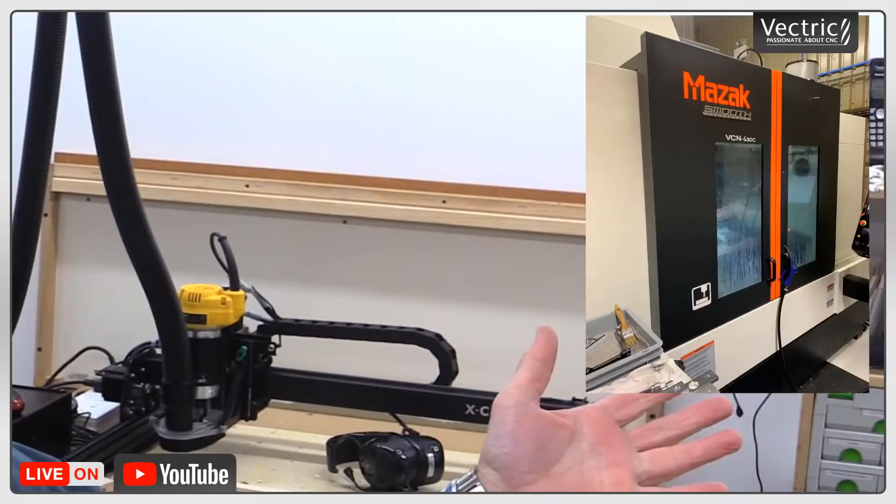I don't intend to talk about doing simple signs or coat racks today, but I hope you'll enjoy what you see. Some of you may know that I design woodworking tools, most of which are manufactured in this country, on very clever CNC machines like these, and they need a lot of very clever people to run them too.

My wasteboard has a number of holes in it, as you can see, and the backing board underneath has a whole bunch of screw inserts. If you've not seen a screw insert before, they look something like that, and you can buy these from all sorts of places - Screwfix in the UK, eBay is probably a good place as well, wherever you are in the world. So those are down under here, and when I want to hold something down, I've got these little screw clamps.

That's what they look like. You can make up your own very easily. Those screw down into those screw inserts, and I can then trap whatever piece I'm working on with some of these homemade clamping pieces. They're very simple, I actually made them on the CNC. They've got a long slot, and a notched area so that they can clamp down onto something and hold it in place. Because they're made of wood, it doesn't matter if you accidentally hit it with a tool either.

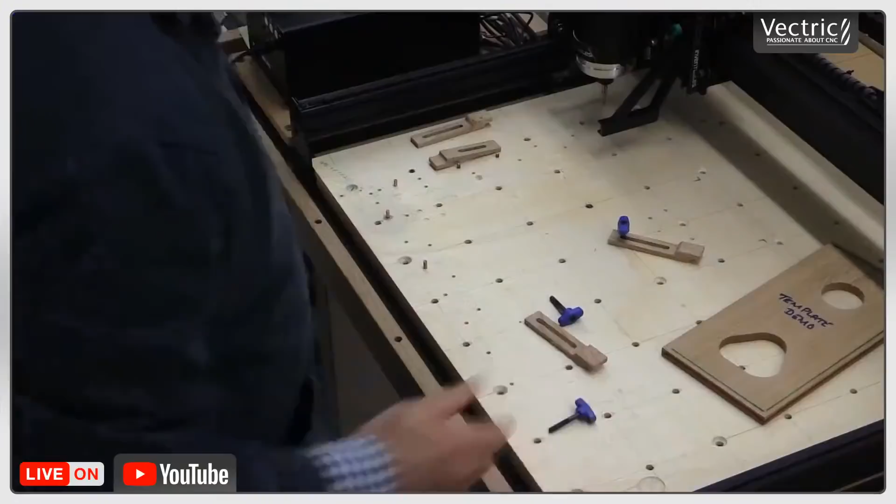Now, when I first started using a CNC, I always found it a bit difficult to work out how I could clamp my piece of wood, my job, down so that it was in the right orientation as far as the X and Y axes went, so I didn't have it skew-whiff. It took me about a year to think of this, but I got hold of some brass dowel, 4mm in diameter.

What I did was put a 4mm cutter in my spindle and drilled some holes, first of all 8mm from the machine's home position in the Y direction, because when you put this into one of those holes, 8mm from machine home, the outside is actually 10mm from machine home. Then in the other direction I drilled holes which were also 8mm from machine home, so the outside of that hole, the side of the peg, is 10mm from machine home. That means when I put something in here, this corner is 10mm in the Y direction, 10mm in the X direction from the machine's home. So that gives me an instant way of setting up the X and Y home positions for a job. I just add 10 to the X and Y hard home positions after they've been set.

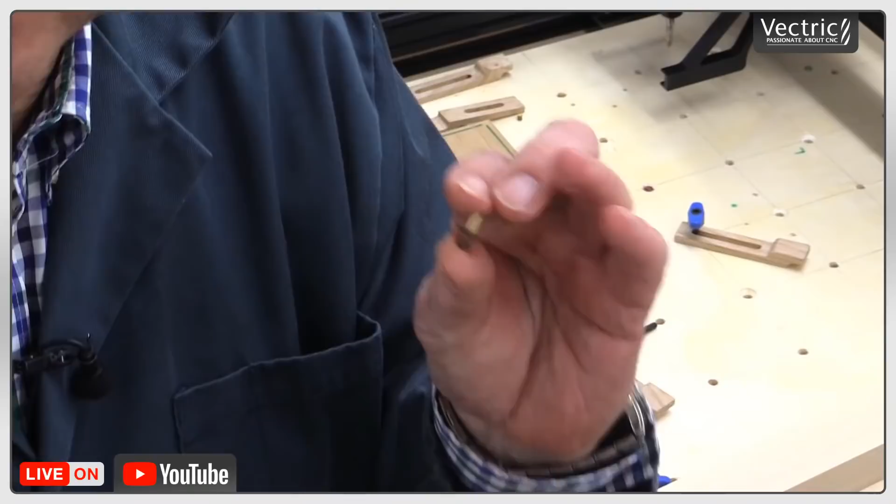Now, I mentioned my 4mm brass dowel. I actually have a lot of metal, and I'd like to show you this little storage box I've made for my various bits of tubing and metal dowel and various other bits and pieces.

There are varying lengths. For example, in this area here they're no more than about 30 centimeters long, whereas in this area they're up to 1 meter long. Inside here I've got some tubing, and if I pull out this one, you'll see what's going on. There's a short piece of tubing that fits down through the top, and since it's short, it fits into a little recess at that level, so when I drop these bits and pieces in, they don't fall through. These are a little bit longer here, and then it gets longer still, and so on. The tubes at the front are ordinary white plastic water waste pipe, and the tubes at the back, three of them, are black rainwater downpipes, guttering downpipes.

Now, in order to get all the holes in the various pieces of wood, which are at different levels, I've used the CNC bridge.

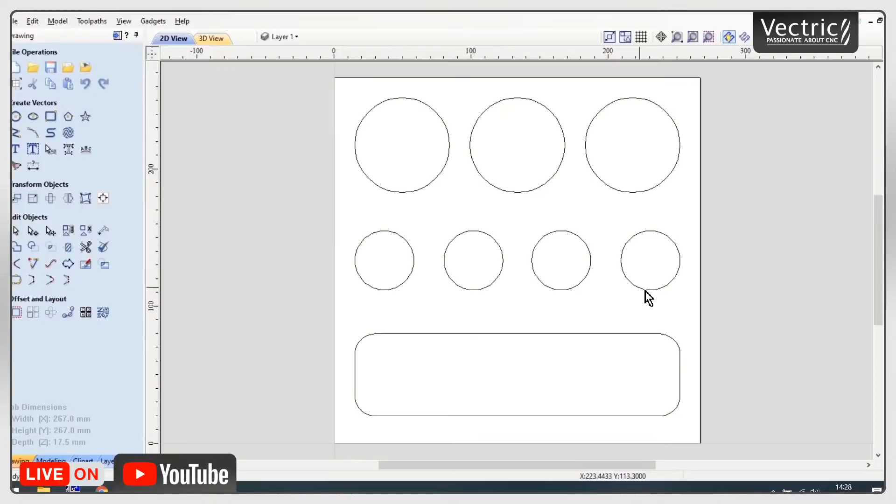So I'm going to deal with the holes first of all. I'm going to highlight them all, like so. I'm now going to go to my toolpath menu, and I'm going to choose the profile toolpath, and I need to be cutting here at a depth of 18mm. That takes me safely through the material.

Now my cutter is already selected, but I want a 1/4 inch or 6.35mm end mill. It's selected there. But if I were to press select, I can choose from any one of the cutters which are already provided with the default program, or you can create cutters of your own. When you do that, you can specify some extra notes.

And I've actually created this one. It says it's a 6.35mm 1/4 inch, and it's set up for wood, because I've now set up my parameters here of the feed rate and the plunge rate that I want this tool to operate at. And that's really important. If you were doing cutting in metal, you might want to have these a lot slower. Anyway, so I'm happy with that cutter.

That's selected. And now you've got to decide how you're going to use the drawings or the vectors you've created here. I want this cutter to go around the inside because we're making holes. So that's as it's selected there. Now there's one thing you really must make sure of: once the cutting comes towards completion, you don't want the piece in the middle, the cutout piece, to start rattling around and get hit by the rotating tool.

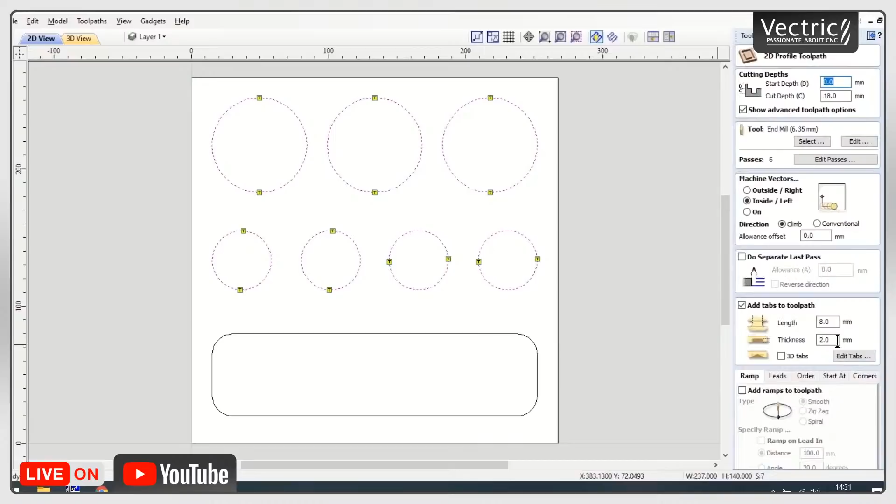And the only other thing I've got to do now is to give this first toolpath a name. So I'm going to call it top tray, or top level. I think when I actually did this the first time, I called it something completely different. Top level. And I then say what cutter: I'm going to say 635 end mill.

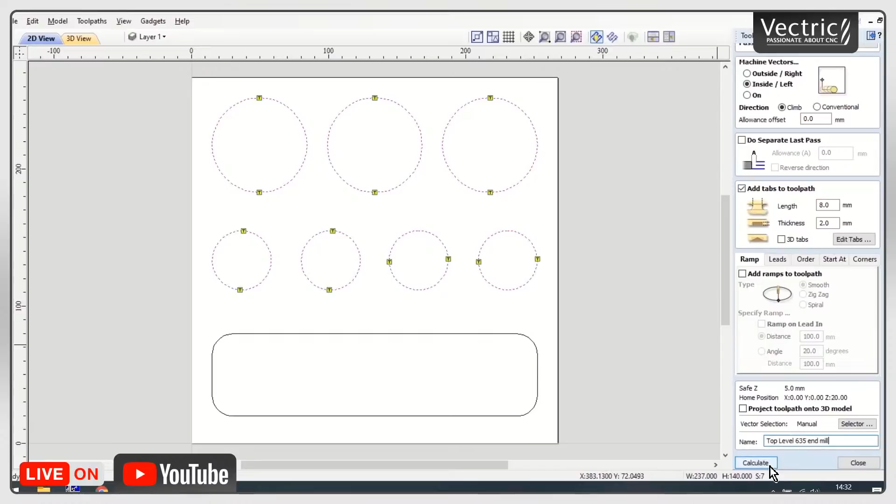So I now will save this toolpath eventually, and it's going to be called something realistic, so I can then remember, yes, it is that particular end mill. So there it is. The software is warning me I'm going to cut through the material. I'm happy with that. And if I preview this toolpath, you can now see those are my holes, and you can see the tabs here.

So that's super. I can close that, but I want to save this as a toolpath. So I go save, and this is where you can now specify how the file is saved to suit your CNC. My CNC uses G-code, and it is the X-carve CNC. Vectric know about the X-carve, and it's one of the options you can take from all of these different CNC machines and so on.

Anyway, so I'm happy, X-carve, G-code. So I'm going to save that, and it comes up with the same name I used before. I'm happy with that. Save. So I've now saved that. I can now close that dialog, and I can go back to my drawing. Deselect those holes that had already been done. I'm now looking at the tool tray.

And for this one, I want a pocket toolpath. It's this one here. And this happens to have the right parameters here. I want the cut depth to be 8mm. My same cutter is selected, so I don't have to change the tool. There are some other parameters here I don't need to change.

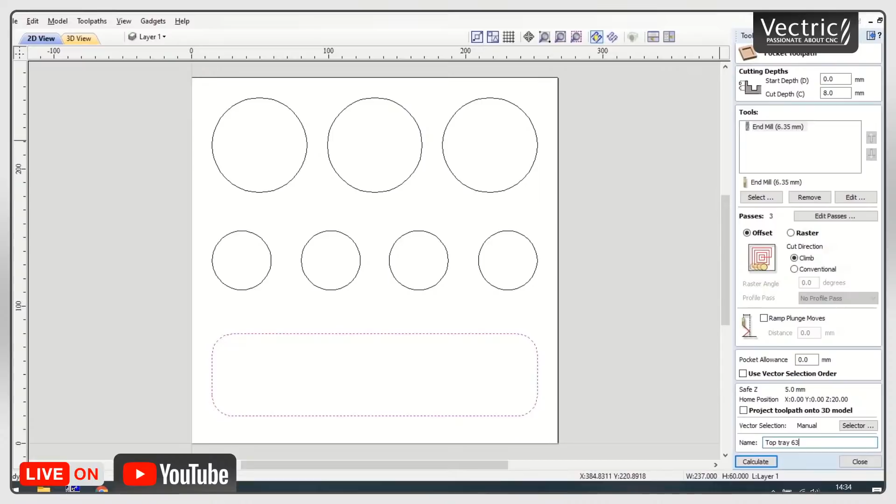I just need to give this an appropriate name, so it's top tray. So I can call it top tray, and my same convention, 635 end mill. So I now know what tool it is I set this up for. And there is my little tool tray area. So that's done. I can close that, and I must now save this toolpath again in G-code, save toolpath.

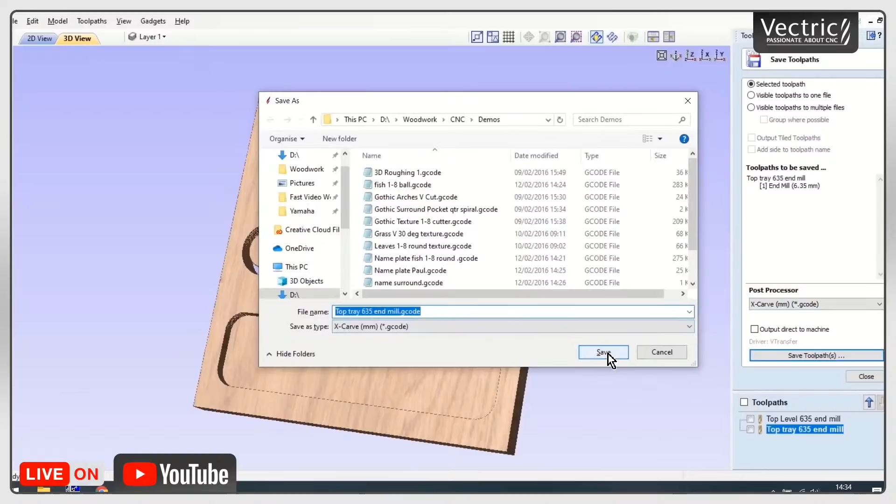There it is, save. Now we're at the next level down, and that means that 2 of my circles, these 2, are going to be stop ends. But these 5 here will be holes again. So I've now got those 5 holes. That's fine. Unselect those. I'll select these 2 now.

Now these are going to be slightly different. These are going to be the same profile toolpath selection, and this time, to guarantee the pipe can go into this hole, I'm going to actually have my profile on the line. It means the pipe can go down to the stop end and fit in it with no problem at all. No need for any tabs or anything like that, of course.

And so I'm going to call this level 2 stop ends, and it's 635 end mill. So there we go. Calculate. And if I do preview, you can see now how that's going to work.

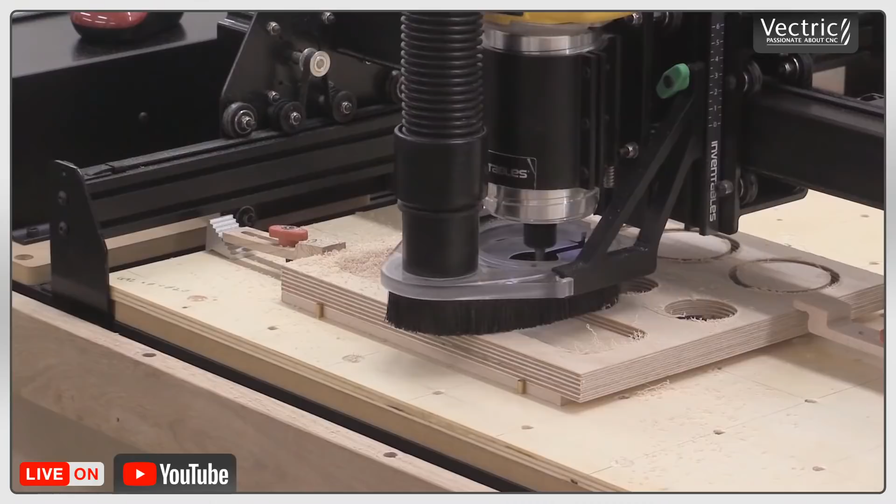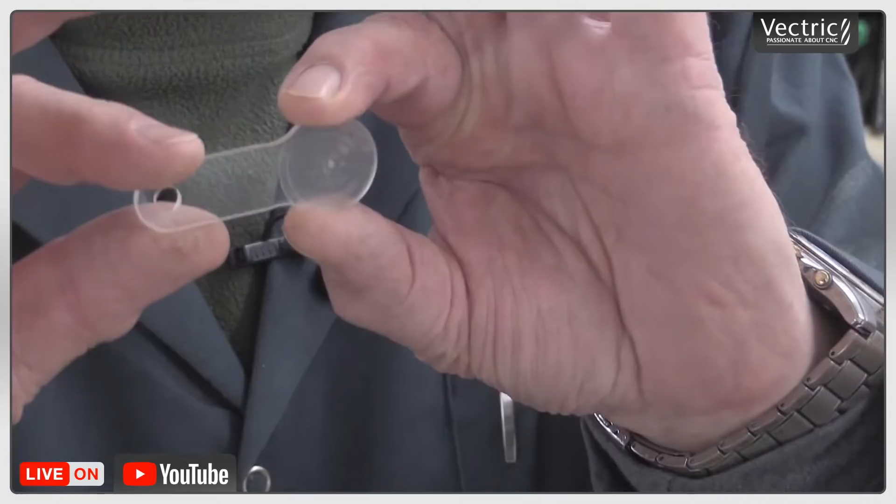And with it up this way, I think you can see just how it's working. Now, before Todd disconnects me from the conversation, I want you to look at this and have a guess at what you think it might be. Diameter is a particular diameter, thickness is a particular thickness. There it is. Wow, that's a great first section.

Lots of good stuff in there. So I'm going to pick out some of the things that I think are interesting, and then we'll go on to talk about what Peter has given us, a lot of stuff to give away to you guys. So I'll talk a little bit about some of the files he's given away for us to include in the package of stuff you can download at the end of all this.

So first of all, the threaded insert thing into your wasteboard. Great idea. We have a couple small format CNC machines in the labs, in the office, and that's what they use, and those are brilliant for screwing down stuff, and using that with the wooden clamps and so on. That's perfect. The wooden clamps, those are great, and as you pointed out, if you hit a wooden clamp, it's way better than hitting something that's metal. So what he's done is given you the file he used to cut his wooden clamps with.

Now what's great about this is Peter tends to use his machine as just a tool in his shop. Just like any other tool he has, he uses it when he needs it, and then maybe the piece becomes part of a bigger project, or maybe there's some work to be done with a traditional woodworking technique. That's the same as with this.

If you cut these from their side like they are there, you're still going to need to figure out a way to put the channel in the top of them so you can screw in the holder. I would love it if somebody could come up with a neat way to index these, and then you could actually put that little channel in with your CNC machine as well. That would be really kind of cool. Anyway, so that file is yours for free as well.

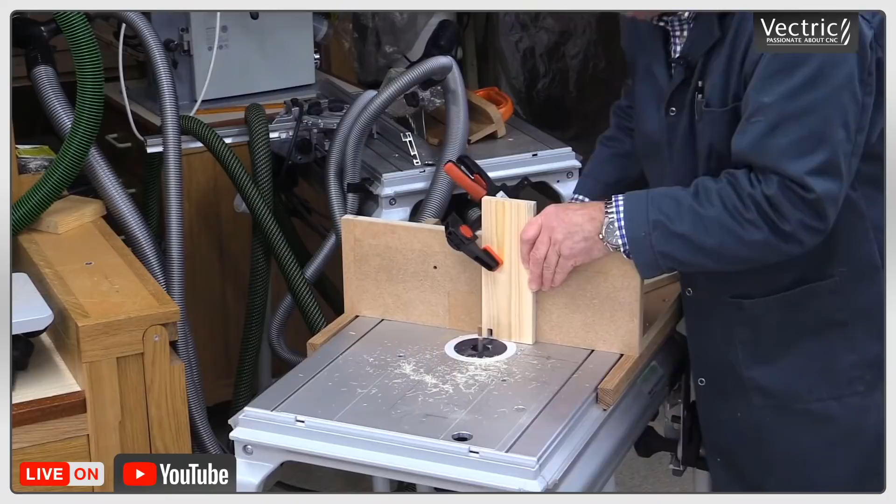All of these parts are terribly easy to make, and the way this works is quite simple. With the first piece, we're going to hold it up against the stop there, move that over like so, and we keep moving it over. Turn it around, put it on there, and then for this next piece, carry on as before with this one.

There are two pieces which go together like so, and you would glue this up and then plane it off or sand it off. And if you do that on all four sides, put a channel in for the base, you then have quite a useful tray or whatever else it might become, a box and so on.

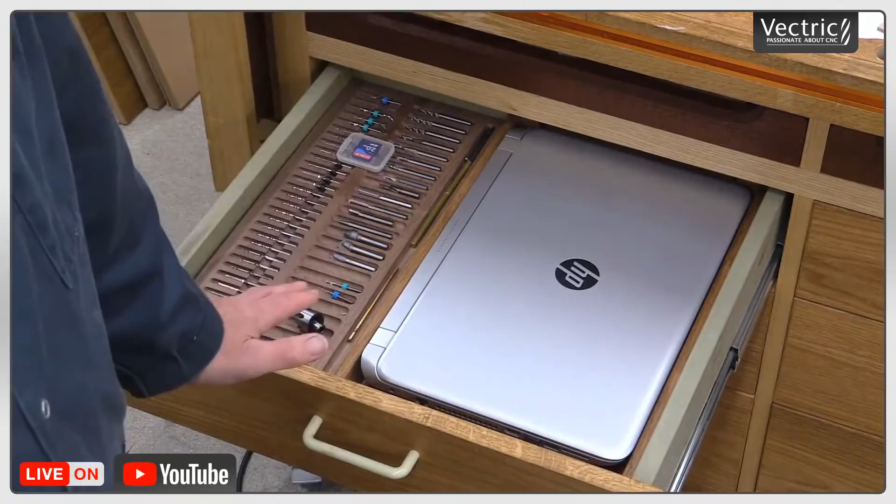Right, I'm now letting you into the secret world of my workshop drawers, well, of this drawer in particular. This drawer is my sort of CNC drawer. In there I've got an old notebook computer which just about does the job in the workshop, and that's on a little tray like this.

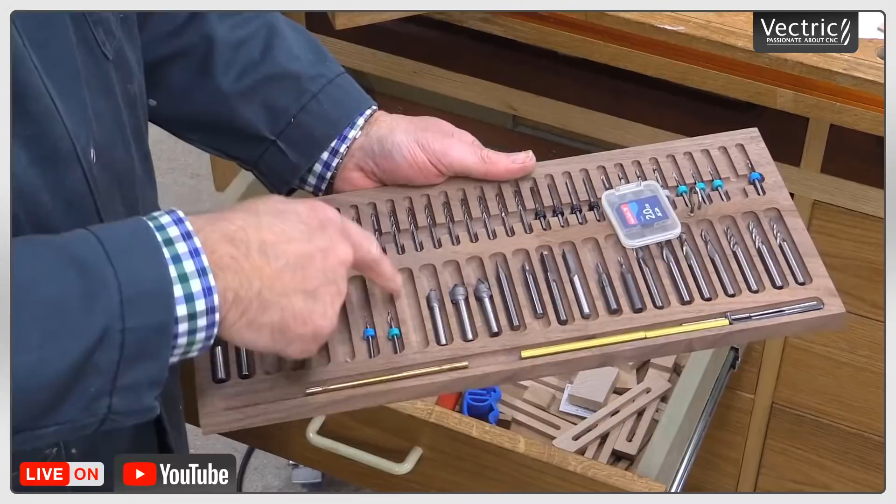And here I have all my various cutters. Now I made this with the CNC, and I'll make sure that the file for this is available to you. And underneath here I've got my sort of little hidey hole place where everything gets put to one side. A couple of things I want to show you here.

I've mentioned these before. I've made all these little hold down things. Some have got this notch in them, some are just straight, and I keep a whole bunch of those in there. Now this little brush is really important. When you've done a bit of sign writing or whatever it might be, using a V cutter, sometimes you get tiny little hairs of wood left in there. Well, this brush has plastic hairs, and you just rub it quite vigorously across there. It doesn't do any harm to your actual carving, but what it does do, it removes the majority of those little hairy bits. And this is a cheap and cheerful brush, which I bought from Axminster many years ago.

Now there's my computer on its tray. On the underside here, using the CNC, I've made a recess to take a large metal washer, and this metal washer is magnetic. In the centre there is a little 6mm hole. Now here, in the top of this little box, I've got 4 magnets which are flush with the surface, and I've got a 6mm brass dowel peg.

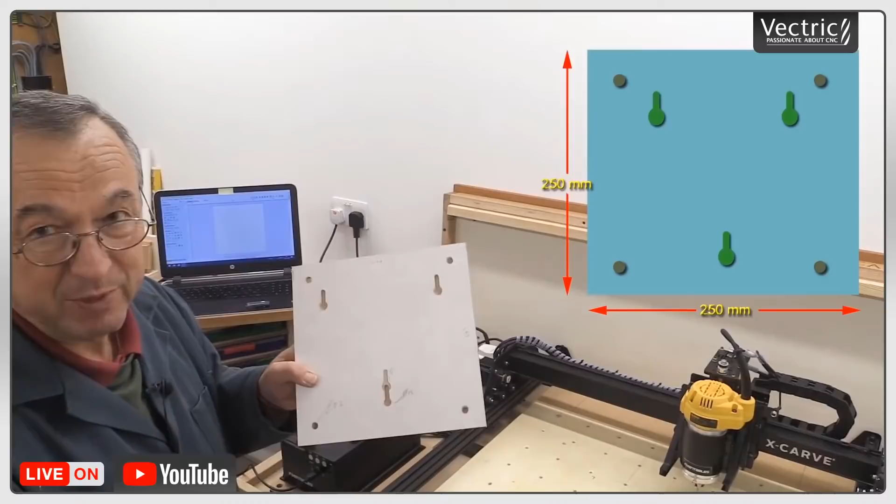So this is what I've done. It's going to be about 250 millimeters square, with 4 holes, one at each corner, 200 millimeters apart, for the 8mm bolts that will be fixed to the TV. There'll also be 3 little slotted holes in a triangular pattern for screws into the wall, so the plate attached to the TV can be lifted on and dropped down onto those screws, and it won't fall away because the screws sit in the slots.

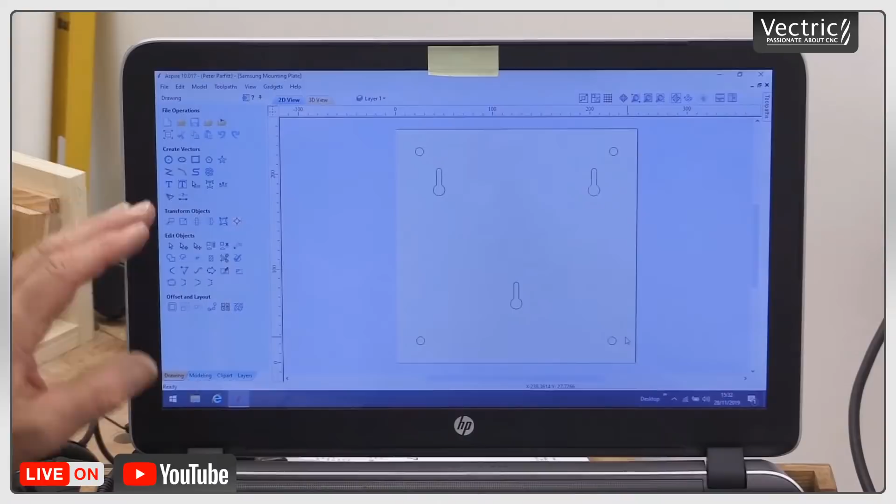In the Aspire program, I started by saying my piece of material is 250 millimeters square. My material is a piece of aluminium plate, 3 millimeters thick, bought via Amazon for just over £5. I've then positioned 4 holes, one at each corner, 8.2 millimeters in diameter, which allows the 8mm threaded bolts to go through into the back of the TV.

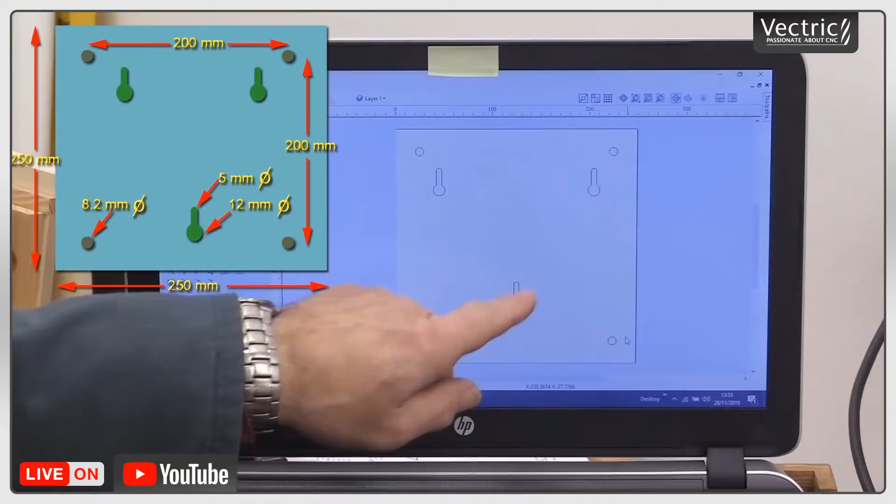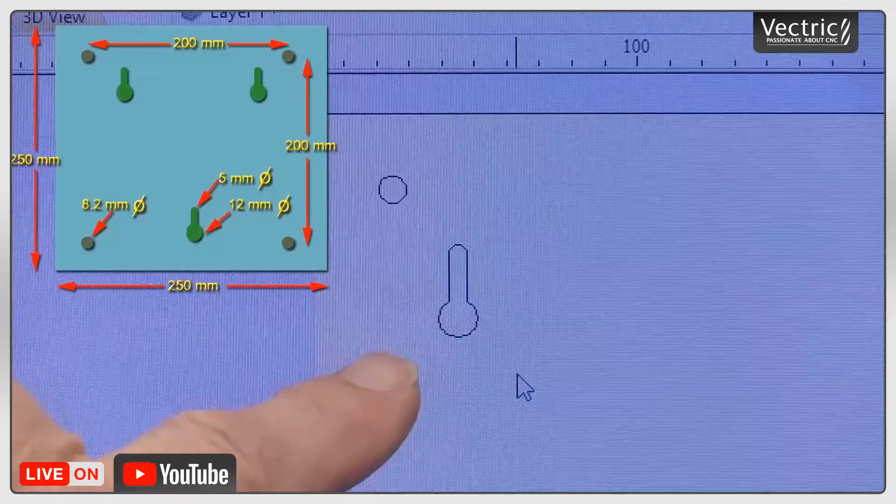I've created 3 identical slotted holes, starting with a 12mm diameter circle, then a 5mm diameter circle, linking the two with a straight line and getting rid of the redundant parts of the two curves to make one entity - that shape. I've then copied that to the other positions.

I've then created tool paths - I know it's not terribly clear from where you're looking, but the 4 holes are here, and the 3 elongated slotted holes are there.

The particular tool I'm using is a 3mm end mill. I've set my cutting depth to 3.5 millimeters because I want to go all the way through the aluminium. I'm using a profile tool path, and I've set the tool parameters really modest. The reason is I've never cut aluminium before, so for example my pass depth is 0.1 millimeter - every time it starts a cut, it only goes down 0.1 of a millimeter. I've also set the feed rate to 0.5 millimeter a second, so it's not going too fast.

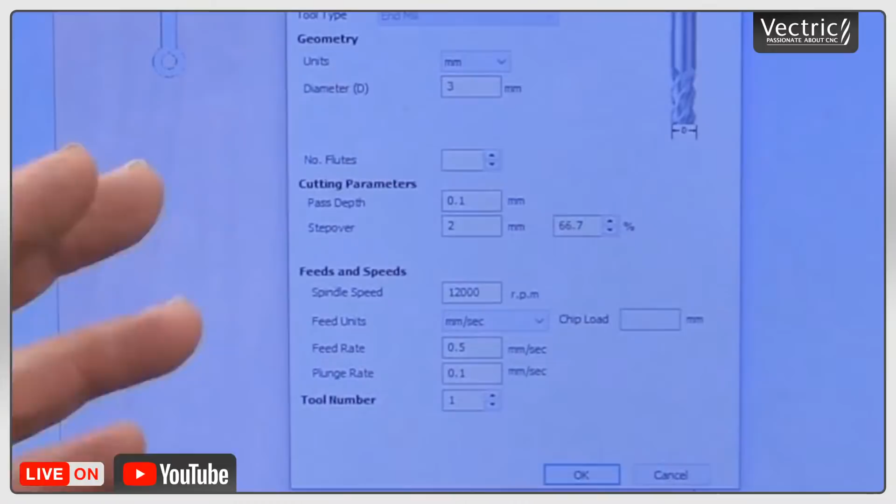My plunge rate, as it goes downwards to start the new part of the hole, is 0.1 millimeters a second, so it's plunging down very slowly. I've set this up this way because, as I said, I've never done aluminium cutting before, and I really do want this to work well. I don't want it to struggle and make a bad job.

I've just done the trial fitting of the plate, and the 4 screws - 1, 2, 3, 4 - at the back fix it onto the TV. In my case these are at 200 millimeter centers. And you can see the slotted holes here, which will correspond with some screws I'll fit on the wall behind me, where the TV's going to go.

Now, with the screws and washers sitting in the back of the plate, I've tightened these screws up fully so it doesn't move, but that's not how we want it because it would be very difficult to get this on and off. So I'm going to back these off now by about 3/4 of a turn.

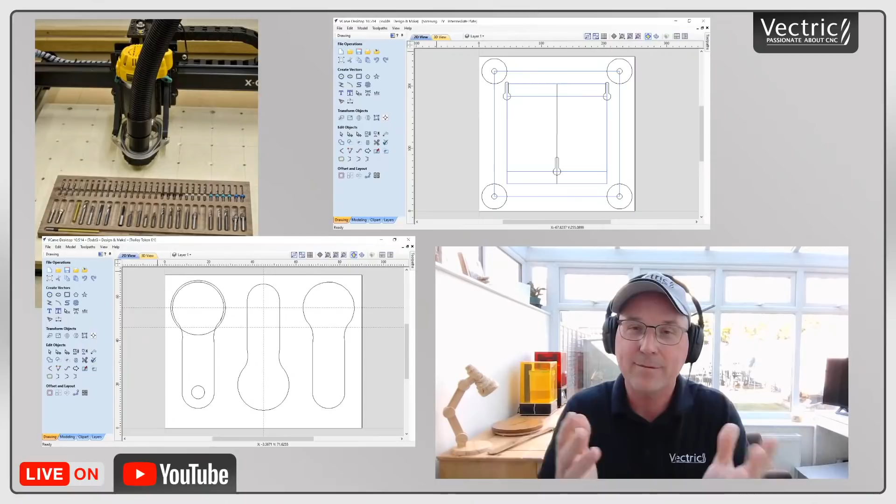And then also the TV mount. Now, this is one of those things—I was just in Costco yesterday looking at the mounts because, of course, I love looking at the TVs there. And just for a static one like this, it was like 24 pounds, so that's almost $30 American for just this static mount. And Peter just made one for under a tenner, as they'd say over here—sounds funny saying that—but anyway, that's amazing. So if you have a piece of aluminum and a bit of time on your hands, you can make this right in your own shop, and that's pretty neat. Thank you for sharing that with us, Peter.

Well, some of you may have noticed when installing our software that you have the option to install a piece of software called VTransfer. VTransfer is kind of the same sort of thing as Universal G-Code Sender, but it opens up some of the options in our software that you may have seen but just didn't quite understand why they were there.

So if you choose to install this when installing your software, when you open up your Save Toolpaths dialog, you'll see at the bottom there's a little checkbox that says output direct to your machine. Now sometimes that'll be grayed out because your post processor won't allow you to use that, but if it is there and usable, and your CNC has the capability to hook up directly to your laptop, you can go right from our software right to VTransfer, right to your machine. It's just a seamless flow of stuff, and it works really, really well.

Now, if you want to give it a shot and you haven't installed it, that's not a big deal. You can just reinstall your software and choose that option, or even better, bring up your Windows File Navigator or File Explorer and navigate over to your program files and into your software's file folder. There you'll see a VTransfer setup file.exe. Just double click on that and it will install for you, and you can give it a shot and see what you think.

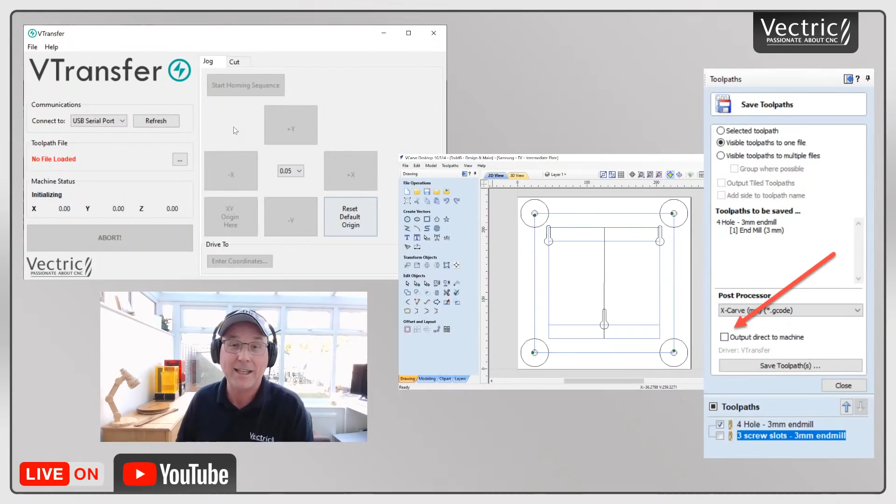It's all very well being absolutely brilliant at making signs that say Fred Bloggs' house or Charlie's coat rack or Fred's bedroom, whatever it might be. But how about making something as complicated as this? So today I've challenged all the clever people at Vectric to try and make one of these. It's a shoehorn, and it's out of a solid piece of wood.

I've been making these for a while. I go about it the old-fashioned way. I rough it out on the CNC, but then do the real work by hand.

Now, this is my shoehorn 3 file. It's my third attempt, in other words. And this time I've produced all of the profiles in one file, and they're in layers.

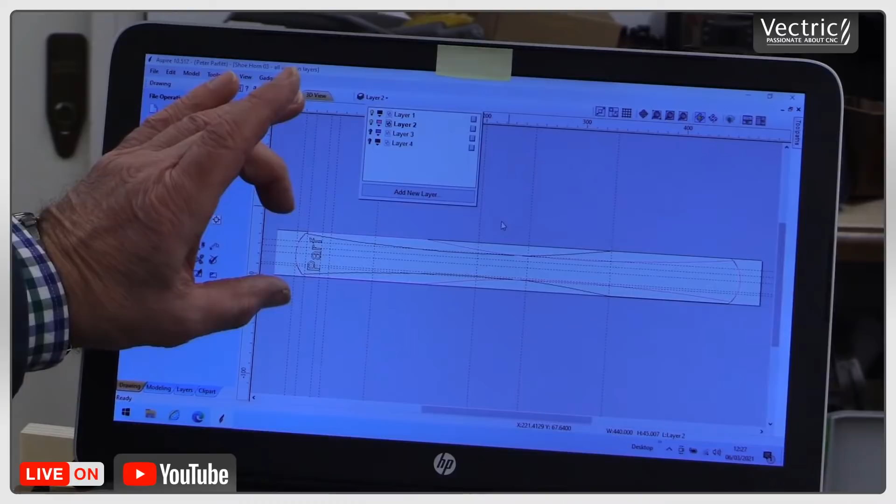Bearing in mind that my stock is not square, it's 35mm by 45, and as you look at it now, that's the 45, and the 35 goes into the Z direction, effectively, that way. And the top 2 layers are the top view, which would have that 45 width, and it's got the Parf sign there.

And these are the other 2 profiles, and these are the side view. Now, I know that I haven't changed the dimensions of my job as far as this goes, but I have taken into account that line there is at the 35 point, so nothing's going to happen beyond there.

So there are the 2 profiles, one with the Parf on the left and the other with the Parf on the right, which allows me to cut both sides of the stock symmetrically.

So I'm now just setting up the tool paths for each of those very simply, and then I'm going to run it. This basic file I'll make available to everyone. There won't be any tool paths because, of course, that is dependent on your particular CNC.

But Aspire or VCarve Pro can give you the whole list of possible machines, and you'll be able to generate your tool paths based on that. And I'm just saving this tool path profile cut now.

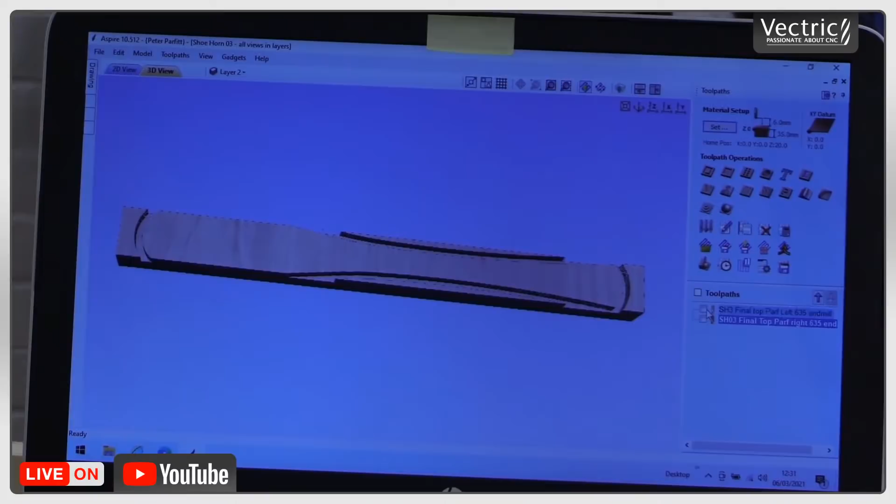And this is the second one, this is with the Parf on the right. If I select the other one, let me just close that, and I'm going to do a preview. And that's the one with Parf on the left, and this one has Parf on the right.

So for that top 2, this last one, Parf is on the right and it does the profile. The one before that, Parf was on the left, it did the profile. And the next 2 I'm going to do are with Parf facing away from me, and it's going to do that profile. And then this is going to be rotated like so, and it's going to do this other profile. So that means we've got profile cuts on all 4 faces.

And there you can see the preview of the side view with Parf on the left. Now remember, we have made a little fib, and we haven't told Aspire that the piece of wood is actually only 35 wide rather than the 45 it thinks it is. So it looks as though there's more material above than there really will be.

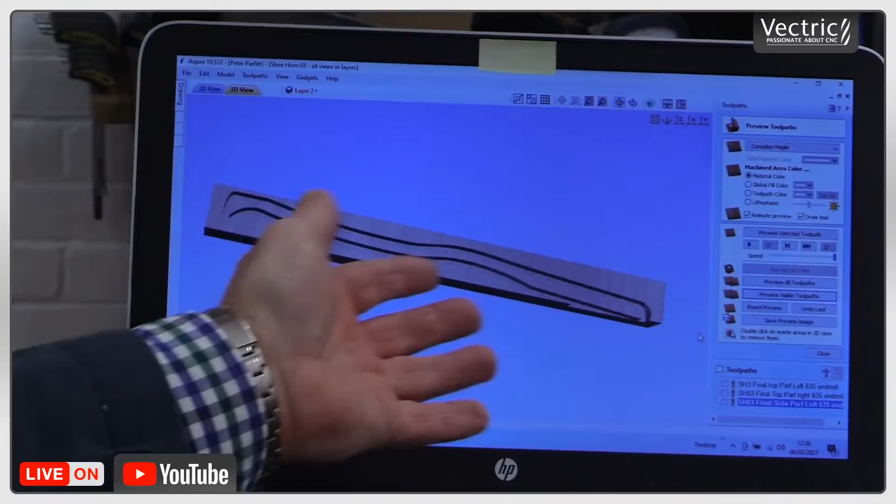And I'll do the same profile with that flipped. So I've called this one Shoehorn 3 Final Side Parf Left. Parf is here, and the other one will be Parf Right. And there's the final preview, side view with Parf on the right.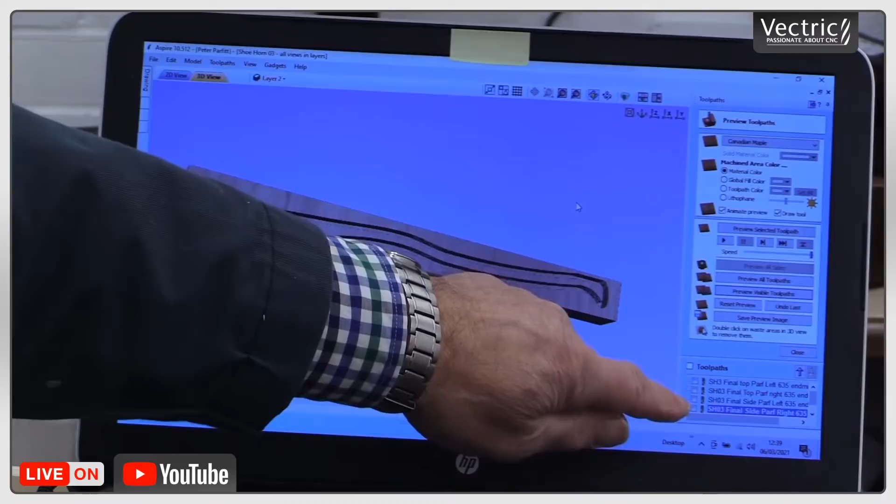Now you can see I've got my list of tool paths here. There are 4 of them, so it's 1 for each face, and each of these tool paths is descriptive. Shoehorn 3, final top, final side, whatever it might be, Parf on the left or Parf on the right. So I know exactly where my piece of stock should be for each of those tool paths.

I can now flip this, and we're going to do the mirror image of this but on the other side. So there's Parf there. We're now putting Parf on the right, we're doing the other side. And note I have enough of these places so that I can locate this properly. So that's secure. I can now run the other profile, which is the top with Parf on the right, because that's where Parf is, just there underneath there.

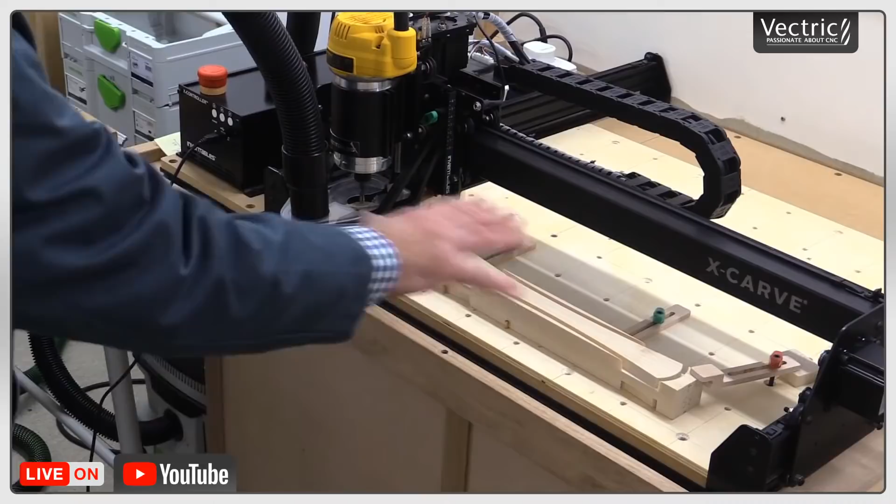And that's the second one done, and you can probably see the shape of both the top and bottom view. Parf's up there. Now all I've got to do is flip this onto a side, and do those 2 side cuts.

Now both the side cuts will be done with Parf facing up the CNC, so it'll be on its side with Parf that way or Parf that way. I'm going to do Parf on the left first, and now I'm going to choose the side profile that says side Parf left.

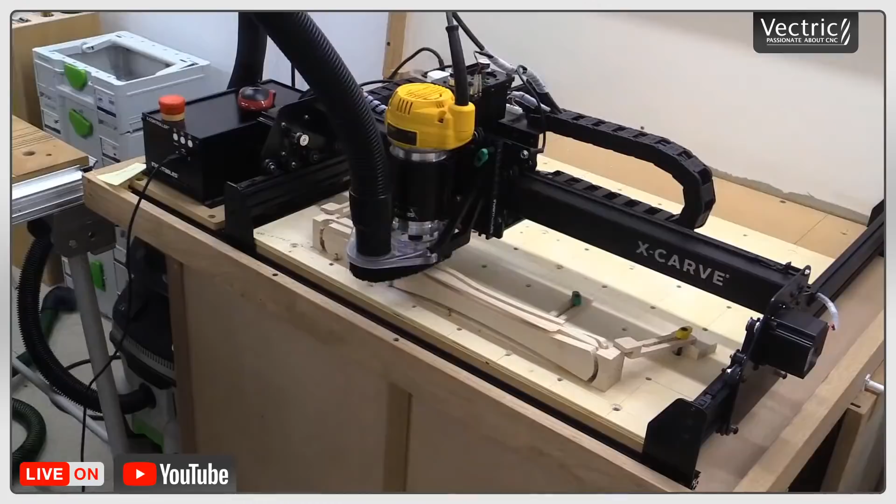And there we have that finished bit of work, and this is where the handwork starts. Well, I suppose handwork starts by taking it to the bandsaw. Right, there's our Parf here, and you can see where we've gone with these profiles, and it's just now a question of cutting through, following the profiles, and then sanding it off.

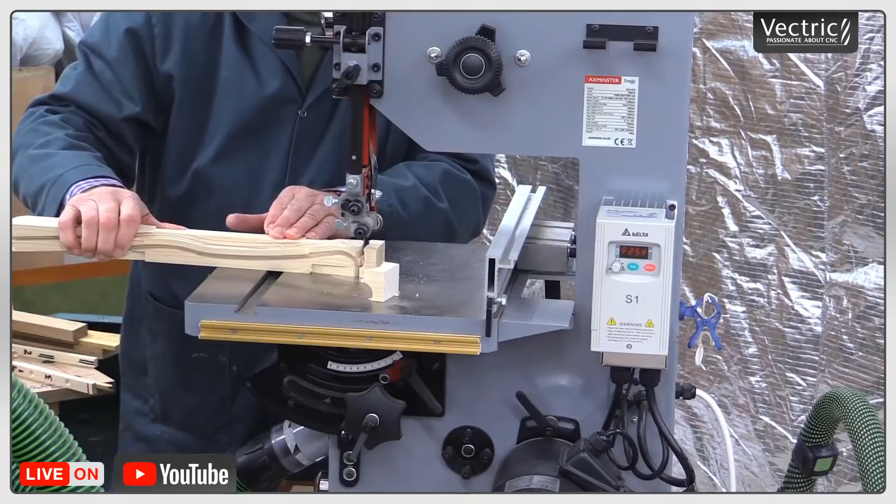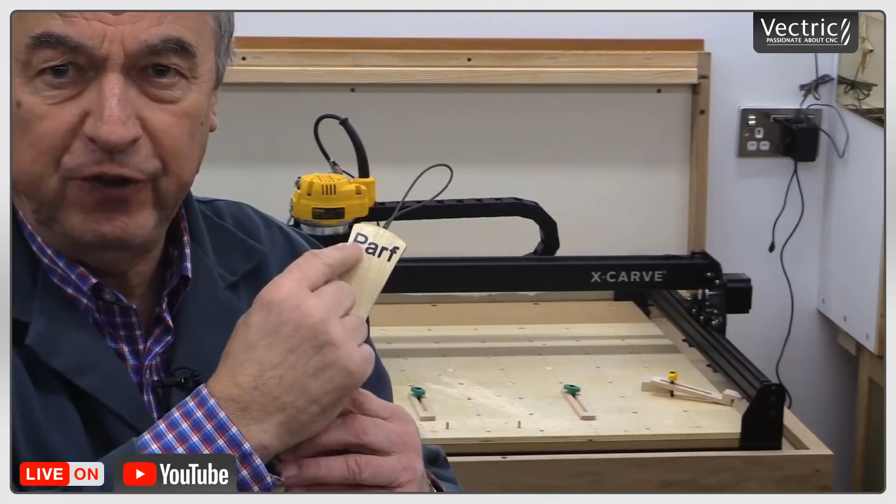And having trimmed off the other 2 sides, I can then start shaping. Once I've finished doing the sanding, I've done the filler here, let it go off, then sanded that clear, and give it a little bit of Osmo oil. And there's the finished piece.

Now, how did those clever people at Vectric get on? I'm sure they've done a better job than me. I don't know about better, but anyway.

When Peter first mentioned this to me, I was really excited about this whole challenge. I love doing stuff like this, not to prove a point, just because it's fun to try and flex your modeling muscle and see if you can make software do things that might be difficult for some people. But anyway, thanks to Peter, he has given me some pictures to go with.

Now, a shoehorn, I don't remember ever seeing one. Maybe when I was a kid, little plastic ones you might get at a shoe store maybe. Even longer ones I may have seen, maybe my grandparents had one, but I've never had a need for one. Not yet anyway, maybe I will. So I really didn't know what to do.

So Peter's pictures were a super help. And then also he sent along the file, like he had said in his video, with all of the different layers in there, so I could go ahead and get an idea of what he was doing and the general shape of things overall. So I did come up with a shoehorn in the end.

Now I pulled a lot of tricks, a lot of modeling techniques, a lot of ideas that we've used for other projects and so on. But there's no way that I can go in depth into all that stuff during this video, so I'm going to touch on a few things.

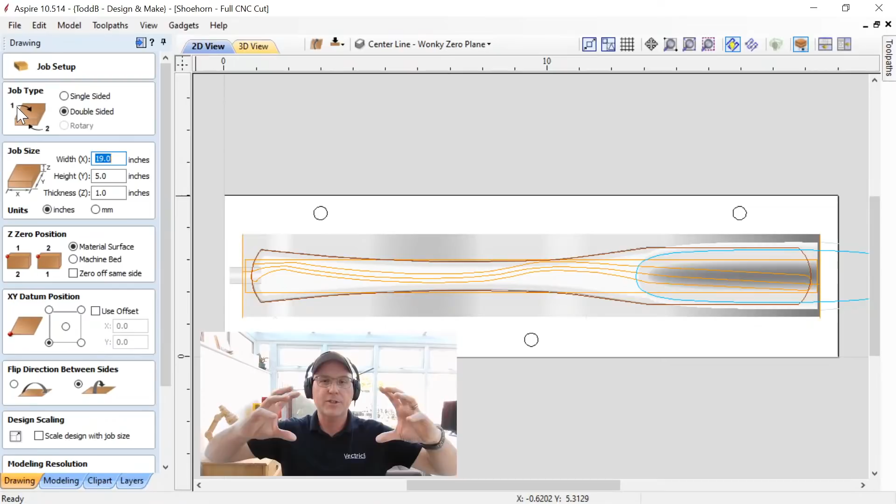So let's have a look at my job setup for this. Now, there's some important things I want to point out here for you. Peter had used a squarish block of material, and I didn't want to do that. I'm cutting on a 3-axis CNC, only wanted to do a double-sided flip. I didn't want to index it four sides. I didn't think that was necessary for what I was doing.

So what I did was I took his shape and I angled it so that it fit inside of a piece of stock that I had in the labs, and that happened to be a piece that was about 1 inch thick.

So this is going to be a double-sided job. I kind of gave that away a second ago. The width of the job is going to be 19, the height is 5, the thickness of the material is going to be 1 inch thick.

We're going to zero off our material surface. Bottom left-hand corner is going to be our datum. We're going to flip bottom to top.

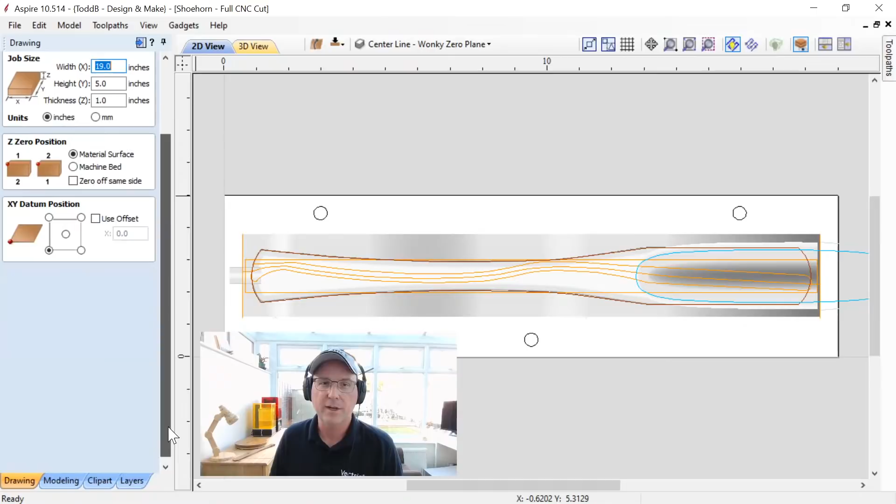And the biggie down here at the bottom is that we want to make sure we have this set to a very high resolution. Because we'll be creating some 3D content, we need to have that turned up as high as we can so we get nice smooth shapes. And we'll just click OK.

So the next thing we'll look at is our layers. Now, like I mentioned, I started this off with Peter's file, so there are all of his layers up top, and then I have my layers at the bottom, and I tried to color them the best I could after the fact. By the way, Peter told you it was his third file, his third version - oh, this was actually my fourth. It took me a few kicks, different ideas, different thoughts on how I could create this thing, and then finally came up with this, which I think worked out okay in the end.

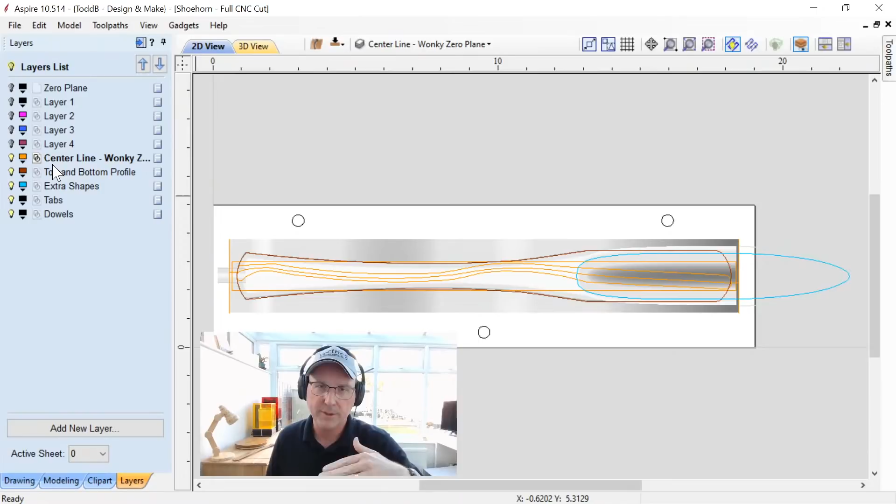And then I have all of my different layers set up with my different bits on all my different parts. Okay, let's have a look at the modeling tab. Now this is surprisingly an uncomplicated part when it comes to the amount of components we need to make this. There are really only 3 on the top, and then equally if we look at the bottom side, we have 5 on the other side, and then the rest of them are made up of the actual tabs to hold it into our material.

Now I haven't showed you the 3D view yet, so let's do that - actually what I'm going to do is hide myself, you don't need to see me anymore. And let's go ahead now and take a look at our 3D view of this thing, and you'll see what I came up with. So there's the shoehorn right there, from the side, from the top, and then from the bottom.

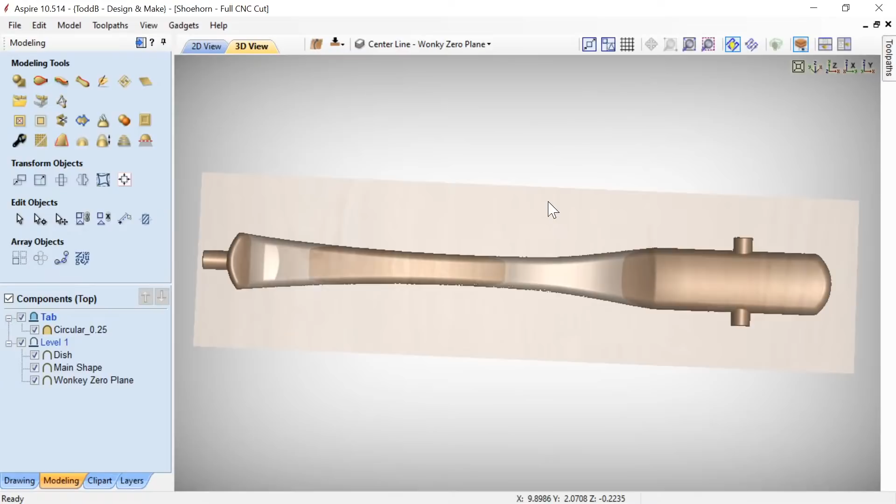Okay, you'll notice that I only have 1 tab on the top, and I have 3 on the bottom. So these only needed to be half tabs at this end, and the other one I wanted to be a full tab-ish with a squish tab. Okay, so that's why that.

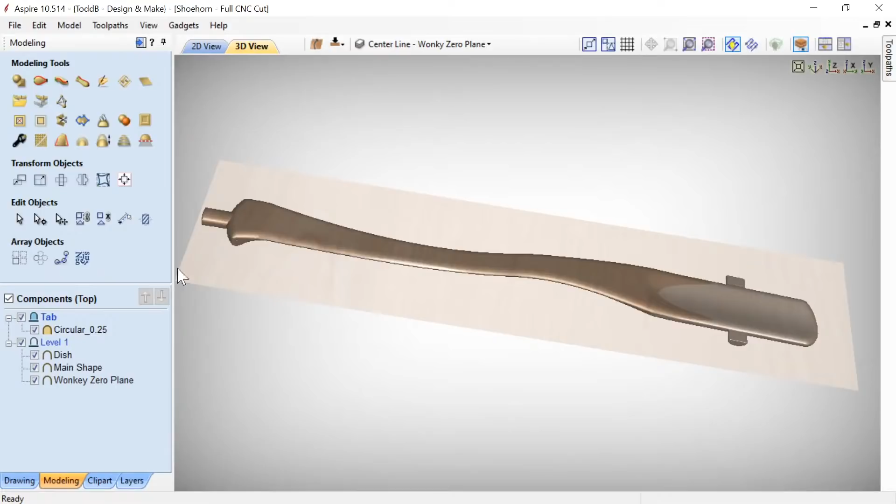So, like I said a second ago, I'm going to point out the high points of this. First of all, I'm going to turn off my 2-sided view - I don't want to see both sides at the same time, I only want to see one side. So you'll see that I have just the components that make up the top of my shoehorn. And then I have this thing underneath here.

And this is what I call my Wonky zero plane. So if I right click on this and say show only this, you'll see that I have this zero plane that I built. Now, this zero plane was derived from a line that I created through the center of the profile that Peter made his shoehorn from. You'll see it right here going along.

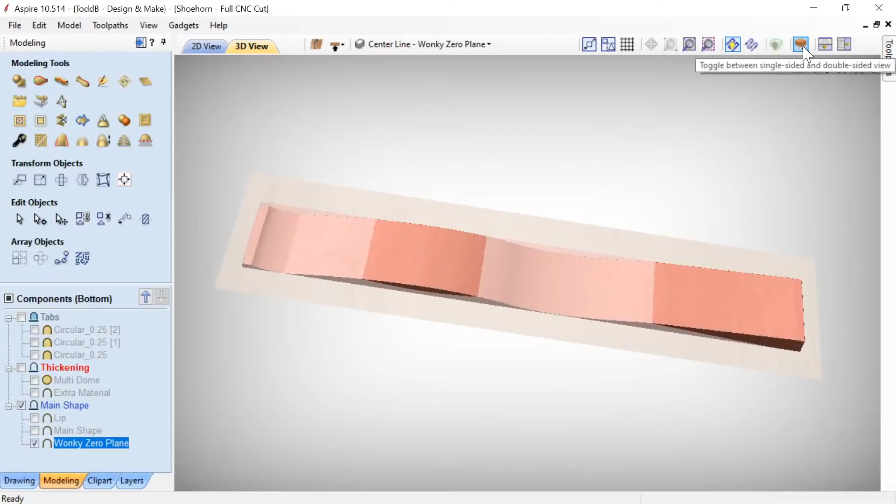Now, I have that same profile on the top side and on the bottom side, and that's there for a reason. So if I go to my other side for a second and show only my Wonky zero plane, and then preview both sides, and go to our 3D view, you'll see nothing shows up. If I unhide this, you'll see just the back and so on. So really what I'm doing is creating this plane that I can start to add components to.

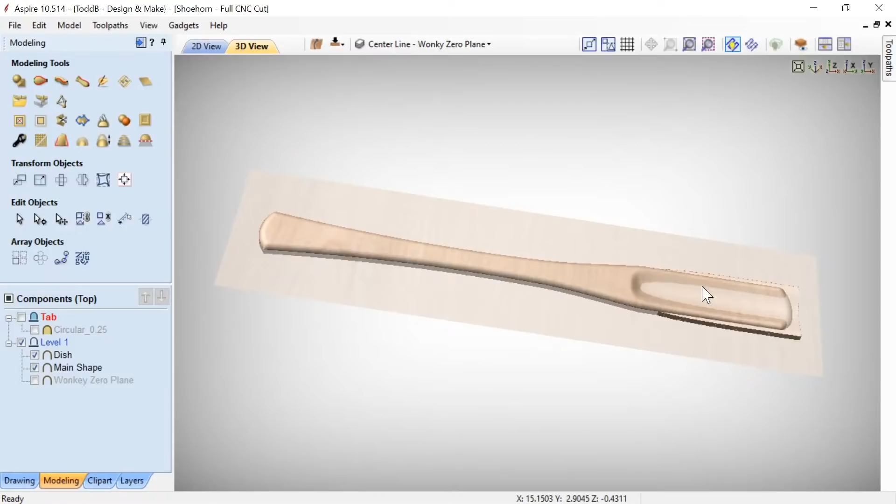So if I go to my front for a second, and we start adding on my components, let's go ahead and turn this to a single-sided view. Let's hide my Wonky zero plane - I'm going to show you my main shape. So this is the main top shape of my shoehorn. Then we're going to add the dish to the bottom for your heel. And then if I add my Wonky zero plane back in there again, you see now it follows the shape of that shoehorn.

So there you go, that's that. And then I add in the tab at the end. Let's go to the other side for a second and take a look. Same thing - there's my Wonky Zero plane, there's my main shape, and there's my lip on the end that I'm adding, a little tail lip there. And then I'm adding this component, or this level, right here. I'm going to just briefly go over this.

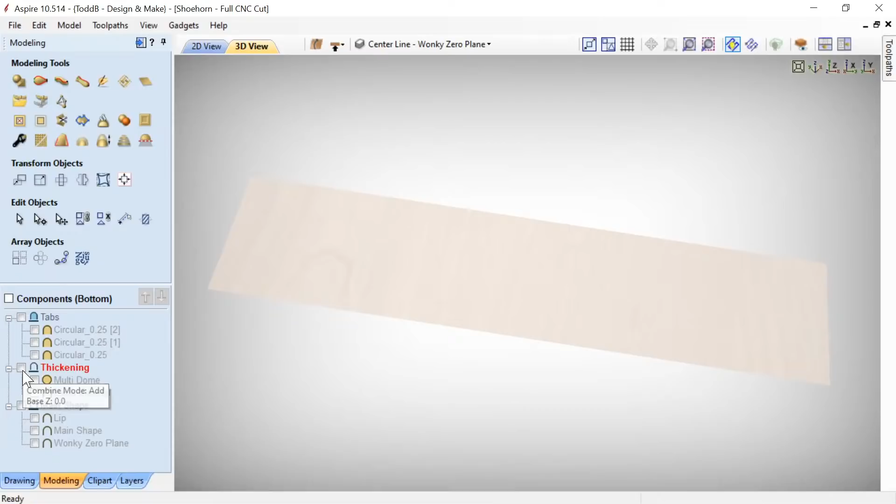If I turn this on, what this does is it creates a bit more material on the back side of my shoehorn. That's there because it wasn't quite thick enough, or I didn't feel it was thick enough, so I wanted to add that into the job. So this is a combination of some extra material, and I'm using a multiply component to actually shape that down to the bottom.

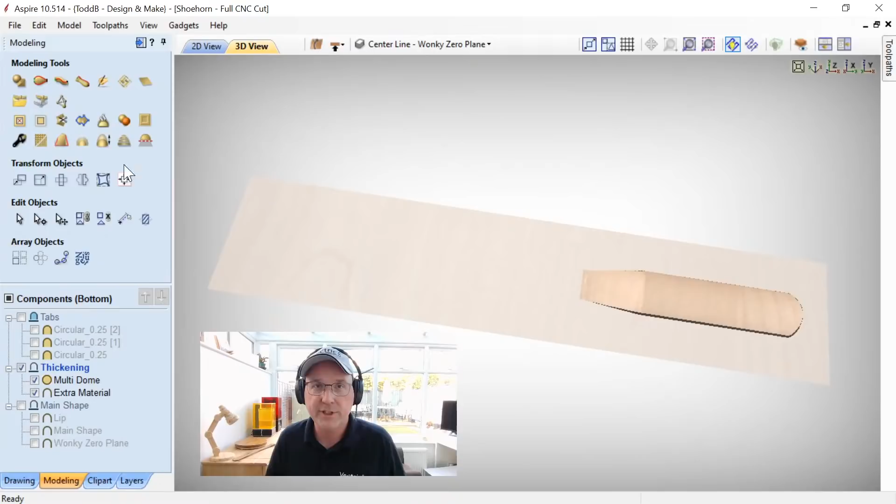If we take a look at the 3D view here for a second, you'll see there's my lump of material right here, the bitmap representation of it. And this shape back here is actually the multiply component that I use. It's a dish that tapers down to the zero plane, scaled to one - in this case 1 inch tall, believe it or not, but it's 1 unit.

When I convert it into a multiply layer, the software will look at the underlying pixels and multiply those by the height of the pixel of the multiply component. So when it's on the outside edge, those pixels get multiplied by 0, so nothing happens. The one in the middle works its way up and gets multiplied by 1, so everything at the top stays at 1. The ones on the edge go away, the ones at the top stay at 1, and everything else gets multiplied nice and smooth in between.

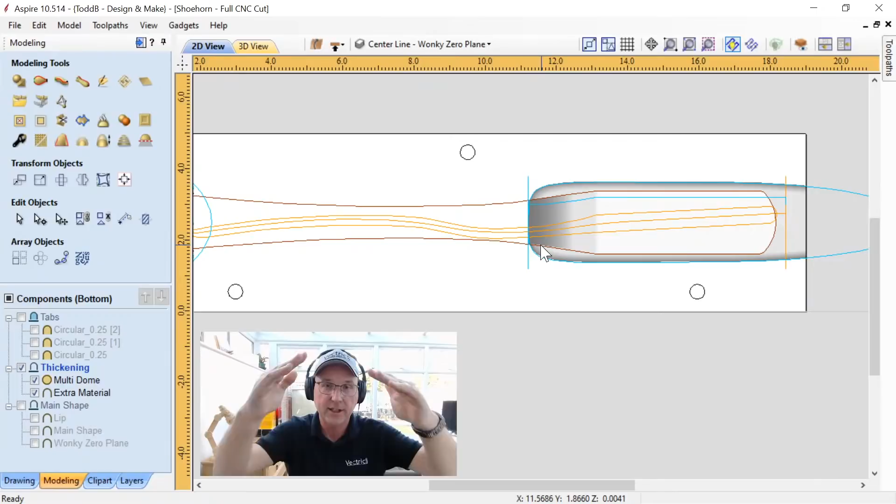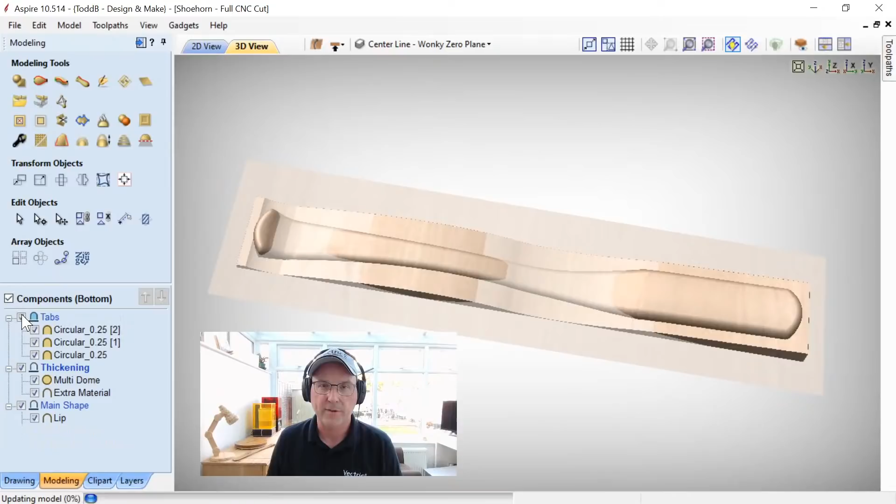That gives me the extra shape I need to create the back of my shoehorn. So if I go to our 3D view and take a look, now I have this dome. Without that on there, it looks kind of flat, and I add that in there - we've got that in the end. Then, of course, we have our tabs to finish things off, and then off we go.

Let's go ahead and take a look at this in 3D again, and there we have it. Now, there's one other trick that I didn't mention to you, but I'll throw it in there.

My Wonky Zero planes - if you look at these components, let's go to my top side here and look at this Wonky Zero plane and its component properties. It has a base height of minus 0.5, half of my material thickness, and I do that to both sides of my Wonky Zero plane. That way they come together right in the middle of my material where I want them to be, so what I see is nothing when I see them both together - they line up and become more or less this building plane that I can start to add things on top of to get the shape I want.

Now, I know that was really quick and crazy, but if you do want me to go into a bit more depth, we can build this from scratch someday or something like that, maybe. We'll see.

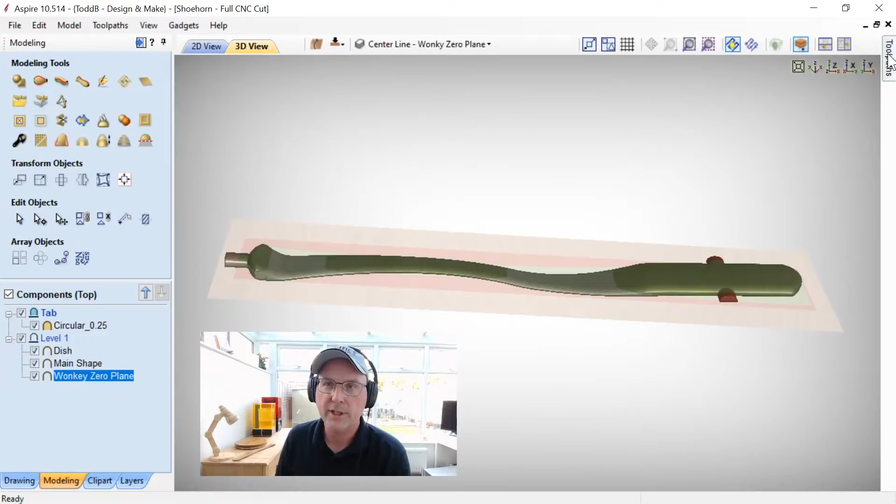So our tool paths are pretty basic as well. Let's take a look at those. For the top, it's very basic - it's a two-sided part. We've got our dowel holes, our roughing and finishing, and our profile cuts. Pretty much the basic standard stuff that you need.

We'll flip to the other side. Same deal, except we have the wasteboard holes that we need to cut into our wasteboard first before we put our material back down again so everything lines up properly.

Because it was a 2-hour challenge, I really gave myself quite an aggressive step over when it came to the finishing passes. That way I knew I'd have a little bit of sanding, but I could get rid of those little cusps with the sanding machine in the end. I wanted to speed up the cutting time, thinking I could make up for that in the finishing. So Peter sent me that 2-hour time frame, so I had to make it all work in there.

Okay, so that's that - that's my files, a few of the tips and tricks and so on. Let's have a look at how this cut in the labs.

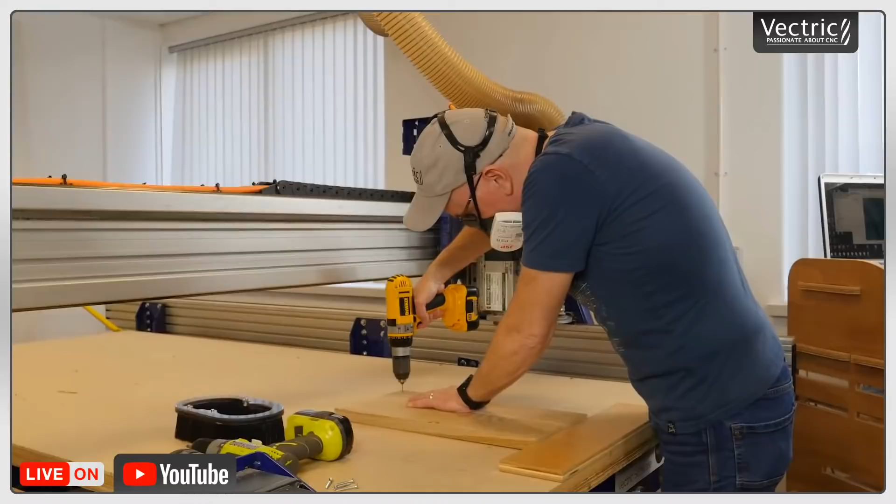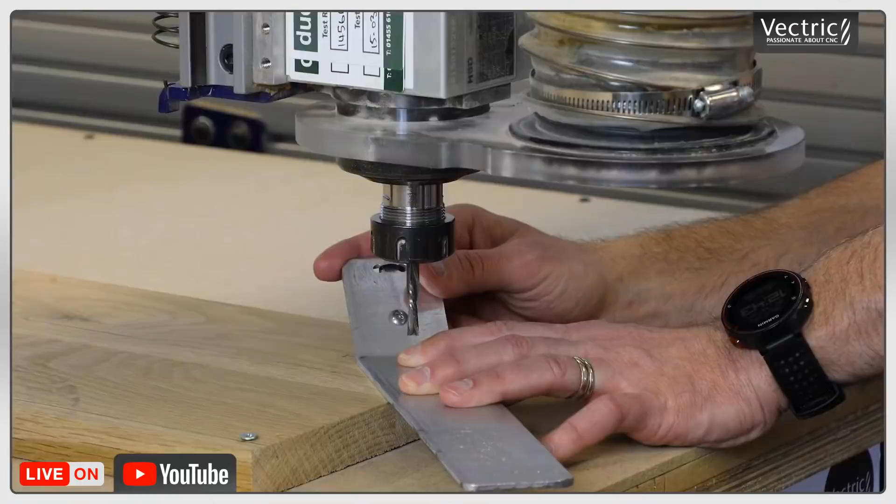So here I am just getting ready to set this up. Everything looks good. I'm going to screw down my piece of oak that I chose to use. Now there happened to be a knot in the middle of this piece of oak, so I had to avoid that by only using the left-hand side of that piece. End mill's in there, I'm ready to start cutting the roughing pass.

Now what's great about this sort of thing is, well first of all, I cut the dowel holes in there. Sorry about that, I forgot about that. And we go into the actual roughing of it. Now I was a bit nervous, I'm always nervous when I'm doing a two-sided part like this. It's a lot of fun to see it happen.

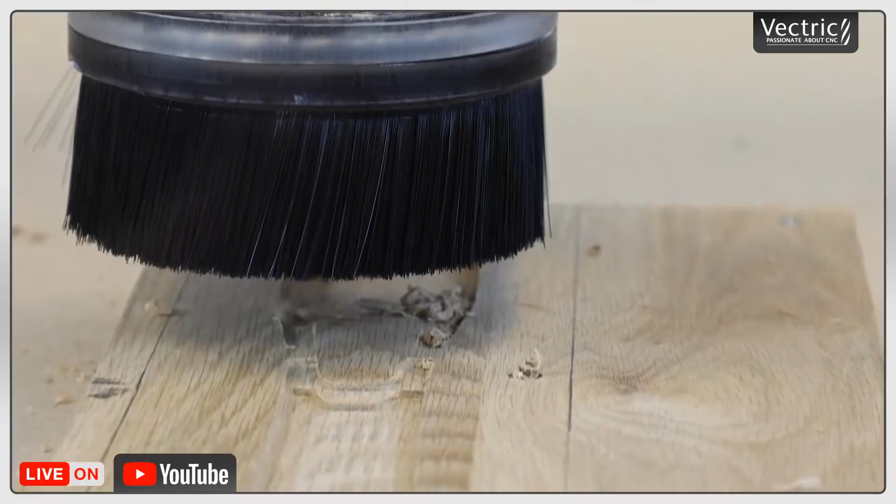Now there we go. See, a CNC machine is like having another set of hands in your shop. I could sit back and enjoy a bag of crisps while it was working away doing its thing. The roughing pass worked out really well, I was really quite happy with how it all went. And I swapped that in for my quarter-inch ball nose and went back in and did the finishing.

And again, I had time to have a little drink of rhubarb soda while I was waiting. Yeah, rhubarb soda, you heard me. It's very strange.

Vacuum that off, and then we're going to put in the end mill to run a profile cut around it. And that's just going to get rid of some extra material I didn't want to deal with from the other side. I really wanted this thing to be actually floating inside my material when I was all done running them. There we have it.

And we're going to go ahead now and put those dowel holes right into our wasteboard. Push in those dowels, then we flip this over. Now it was a really, really tight fit, but I noticed there was a bit of a warp, so I had to get up there and use a little bit of knee pressure to get that flat when I screwed it down. That did make me a bit nervous, but in the end, running these tool paths, I could tell everything worked out well.

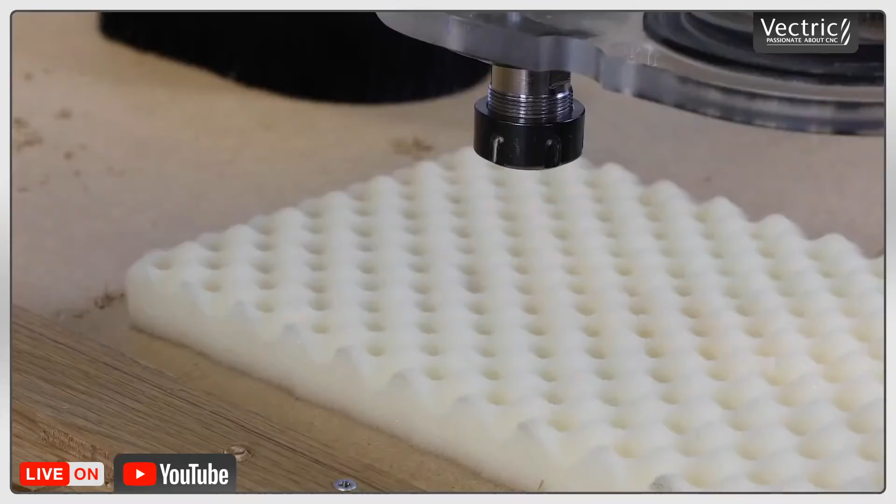Again, one of the fun things about this is being able to see your part emerge from your piece of material and it actually sitting in your material block when you're all done. It's kind of a neat thing. It's a little nerve-wracking, but it is really fun to see happen.

I was really impressed with how this cut, even with the aggressive step over, it still worked out really, really well.

There we have it. Put in an end mill, and we're going to run a little profile cut around there again, just to get rid of some of the extra stuff that was there that I didn't want to deal with later on. Made my edges of my shoehorn nice and straight and flat. Took that off there, and there you go.

It's amazing, every time I see it, it's really cool. Cut that out, did a little bit of sanding just to get rid of the tabs, and then get rid of some of those little cusps that were left by my aggressive step over. A little more sanding. I wasn't aware at this point of how long it was going to take, so I'm still working away at it.

I put oil on it just because I couldn't wait that day for any other kind of finish to dry, so I figured I'd just put on some oil, and that way it would preserve it a little bit.

Yeah, and there it is. I'm pretty happy with that. It's right here, by the way. It worked out really good. And you know what's really great about it? My wife likes it. If my wife likes it, then it's got to be okay because it can stick around, which is kind of nice. I like that. So there are my times.

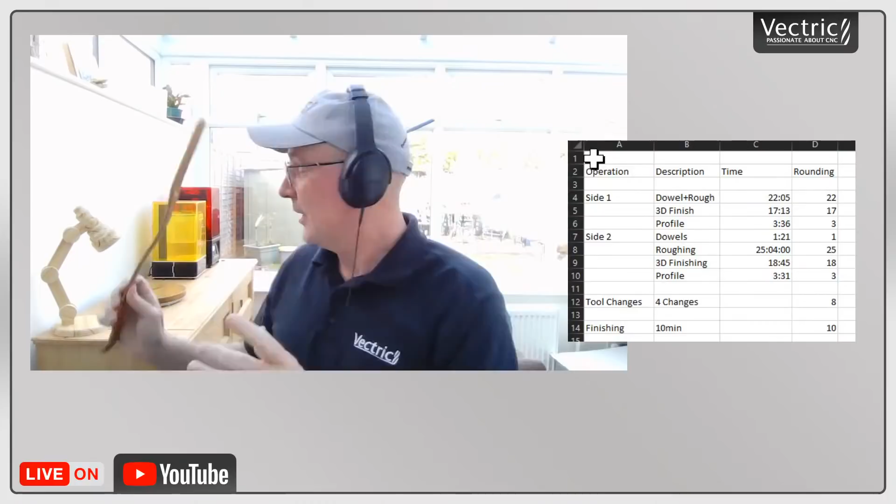Now the challenge was to get this into 2 hours and see if I could fit it in there. So here is my total time altogether. It is 107 minutes, and I had time in there to have a drink and some chips. That's not too bad, eh?

That's pretty good. So all joking aside, I didn't add in my design time, which probably would have sent this into multiple hours. But once I have it done, it's only going to take an hour and 47 minutes every time to make one of these.

But to be fair to Peter's technique, both have their pros. Every one of his are going to be handmade, with respect to, they're all going to be different. Each one is individual. It's going to be a beautiful piece to give away, which is amazing.

On my side of things with the CNC, I joke about having it working in the background, but of course that is a benefit, and also it's repeatable. I can customize it in different ways if I want to, and I don't have the skills like Peter does to create a beautiful piece of craft like he does.

So this is where I can start, and I think overall it worked out okay in the end. I'm pretty happy with that. So now let's go on to Peter's third video here, and then I'll be back to talk to you in a second.

Now, template routing is a very important concept, and I'm sure many seasoned CNC users will be aware of what I'm talking about. The idea is that you take a router, and in the base you put a guide bush. That guide bush allows you to follow a template, and you may be following it on the inside or the outside.

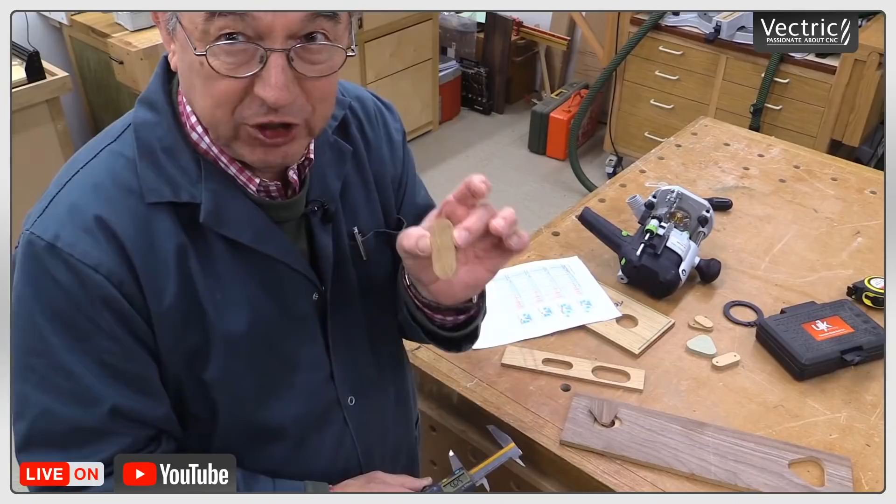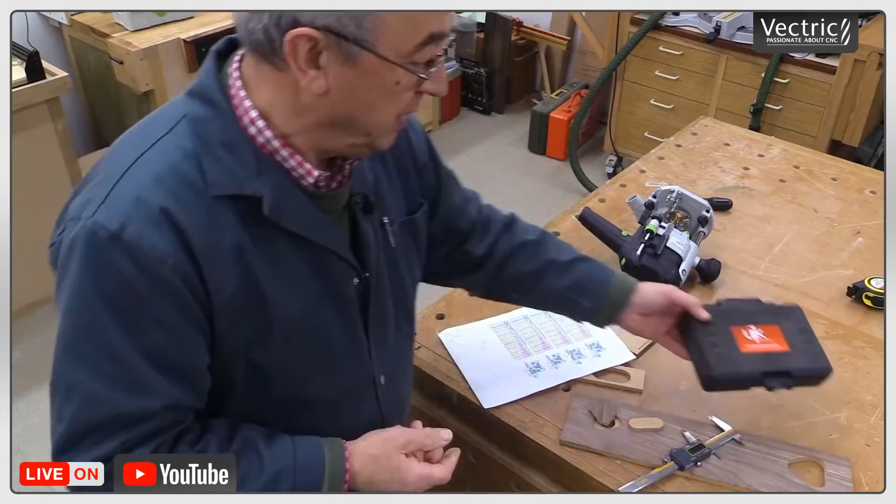And then when you've done that, you refer to a router offset table, which will be made available to you at some point after today. On there you look up the offset you can achieve with a certain size template and a certain size cutter. You know all your sizes of cutters that you own, and all the different sizes of templates that you might have. From that you say, aha, I will have an offset of...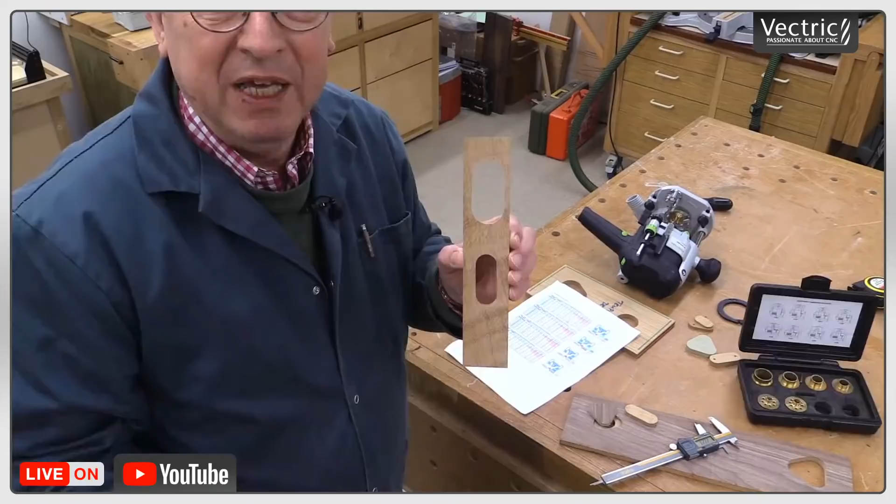For example, 6 millimeters. So, having measured this in each direction, you now need to make your drawing, which is in VCarve Pro, bigger in all directions by 6 millimeters. And then you take that to the CNC and you produce your template. You then put the correct size guide bush and cutter in your router, and you use this as a pattern to follow. You will then produce an exact copy of that.

But you can go further than this. If you've chosen your offset carefully, you'll find that you've got another size guide bush, perhaps another size cutter or vice versa, and you can then use this template to make a hole which is an exact fit for the object that you've created.

So with one template, you can make something that allows you to make a hole or the object itself. That is exactly the approach that I made when I created this design, which I'll show you shortly on Aspire, which allowed me then to make this hole for this to fit into. It also allowed me to actually reproduce this.

My template looked like this. In the video you'll see a different template because I accidentally got rid of the old one, but I made up a new one to show you today. This is the triangular shape with the offset added, and this is the circular shape with the offset added. Because we want to do this concentrically, my template is one that can be flipped. When I was creating this template, I first produced this on the CNC, then flipped it, and produced that on the CNC. Those two things are concentric in reference to the two edges nearest to them.

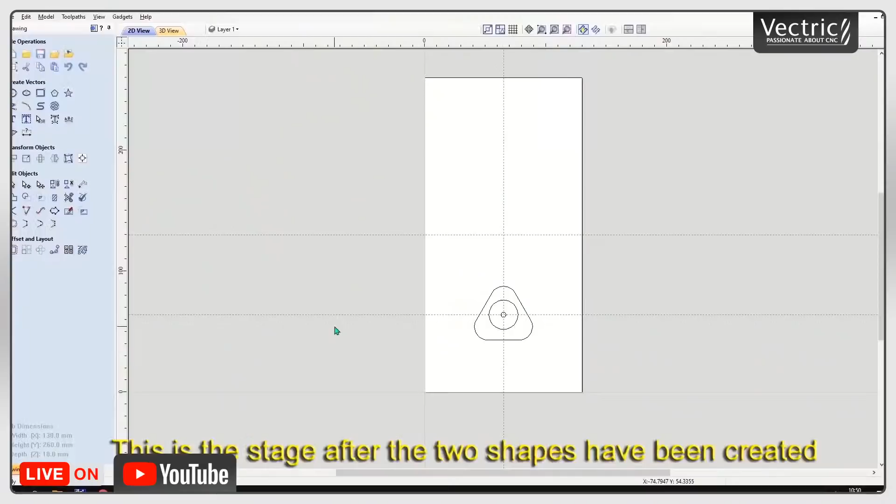Let's go straight into Aspire, where I've created the drawing for this shape as it is. The reason it's down there is that half of the template is going to be on this part of the material, and the other half will be up here. That will be done by flipping the piece of material in the CNC between the two cuts of the toolpaths. If I go back to this triangle, I need to produce an offset.

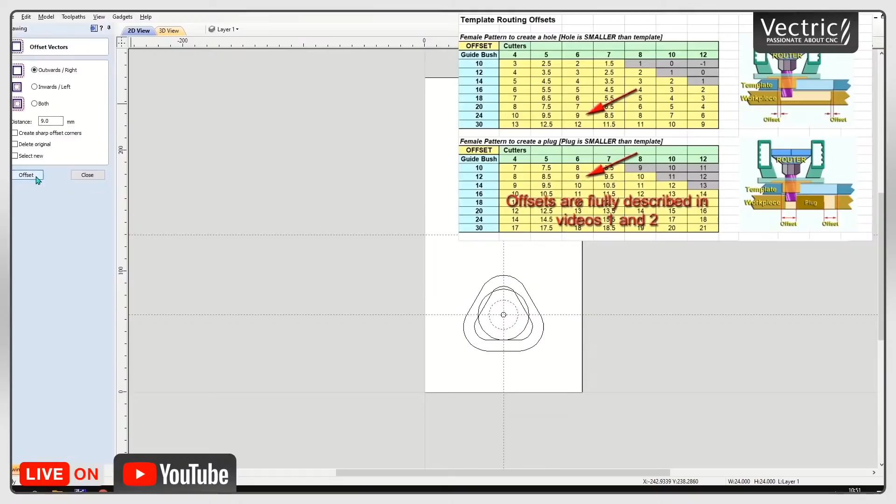It's an offset going outwards of 9 millimeters. 9 millimeters is the offset I'll be using when using the router to cut these shapes. I'm going to do the same for the circle, offset outwards to the right, and there we go. So I've now got two offset lines, one for the triangle, one for the circle.

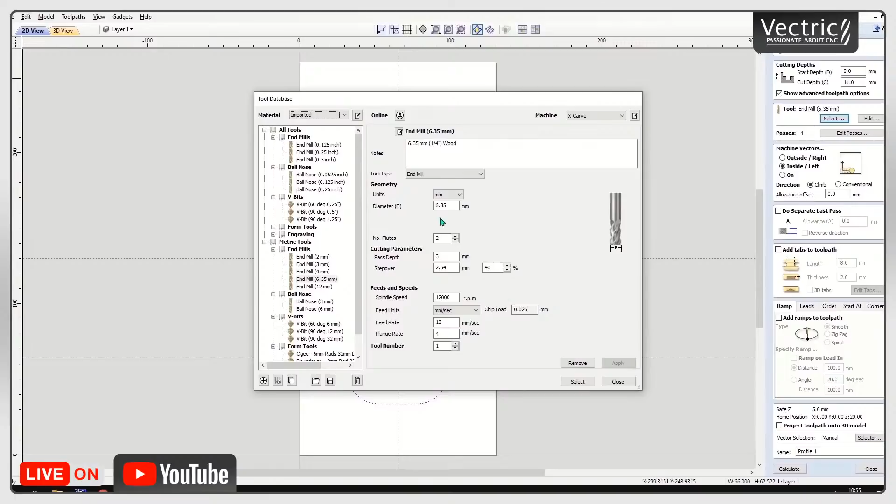I'm selecting the triangular one. I'm now going to go to the toolpath menu and choose a profile toolpath. I want to cut to a depth of 11 millimeters using a 6.35 millimeter cutter, which I've selected. Note you can select all sorts of parameters and change them here if you need to, about speed and rate of cut and so on. My cut needs to be on the inside.

I'm not having any tabs because I'm using double-sided tape to keep the pieces in the middle from running around. I'm going to give this a meaningful name, triangle, and I'm going to say 635 end mill, which reminds me what tool should be in the router when I do the cut.

And there you see that cut, and that looks the right shape for my template. That's good. After I've done this, the next thing to do is close that and save this toolpath. When you press save, you have the option to choose what post-processor you want. Now, I do everything in G-code, but there are loads of different tools you can set the post-processor for. Mine is the X-Carve millimetric G-code. So there it is, saved in the right place, that's done.

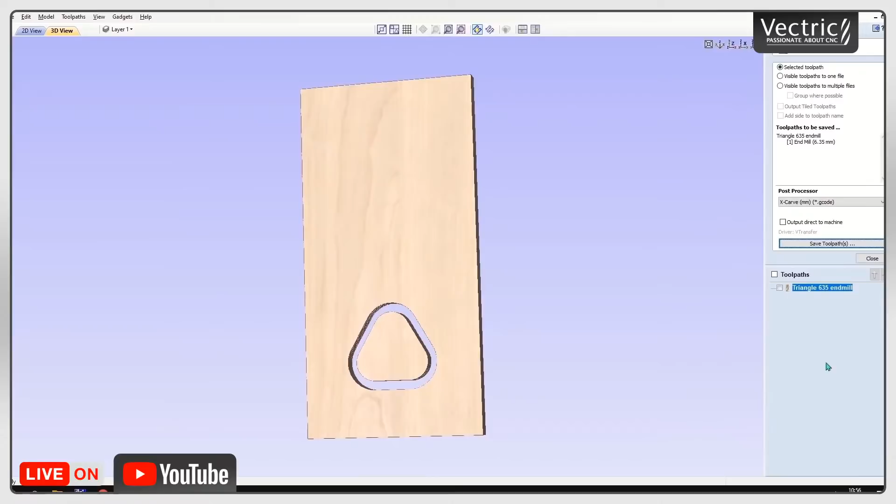So I can now close that and turn to my 2D drawing. I'm going to select the circle to be cut out of the other part of the material. There it is. And I go to the same toolpath menu again. I want to do a profile toolpath.

There it is. I'm going to use the same cutter, same cut depth. Everything else is the same. Inside, yep, fine, no tabs, straight down. All I've got to do is give it a name. Now I'm going to give it a meaningful name, flip.

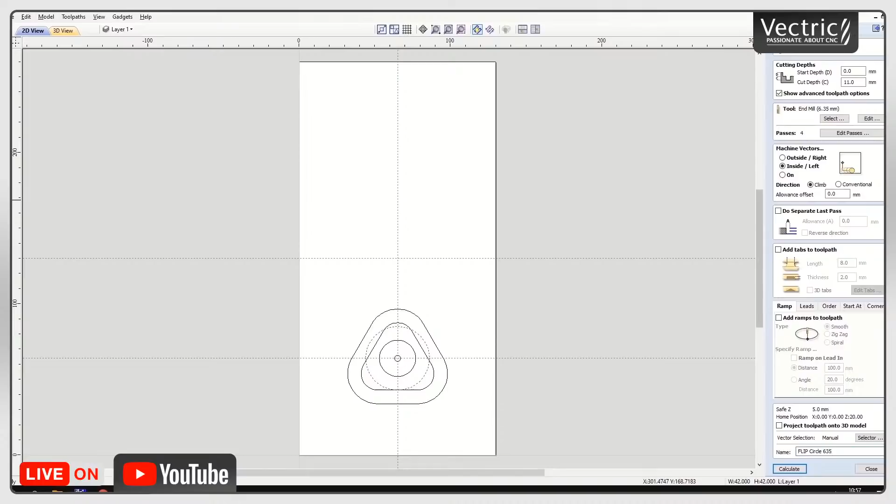And I need to flip my piece of material in the CNC before this cut is done. I'm calling it flip circle 635 end mill, so I know everything about that toolpath that I need to know. The flip reminds me to flip my material over, because otherwise I'll have everything in the same place, which is not what I want.

Now you can just preview the one toolpath you just created. I've reset it. You can go up to this area. You could either single step through a toolpath creation, or press the left-hand button there and see the whole thing done. And again, there's our circle, all nice and neat.

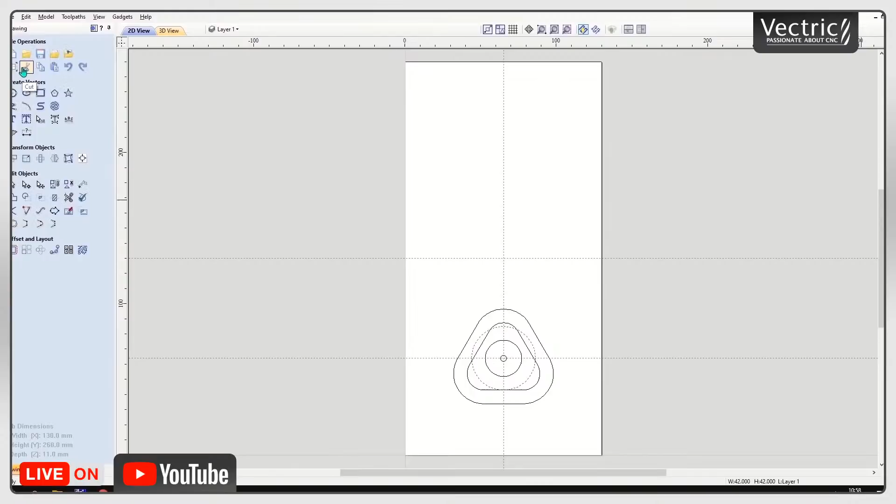So we'll just close that now and then remember to save it. That's G-code as before, save the toolpath, and that's that toolpath saved. So that's actually everything we need to do. I'm just going to do a final save in case I need to come back to this, and now we can look at getting it machined.

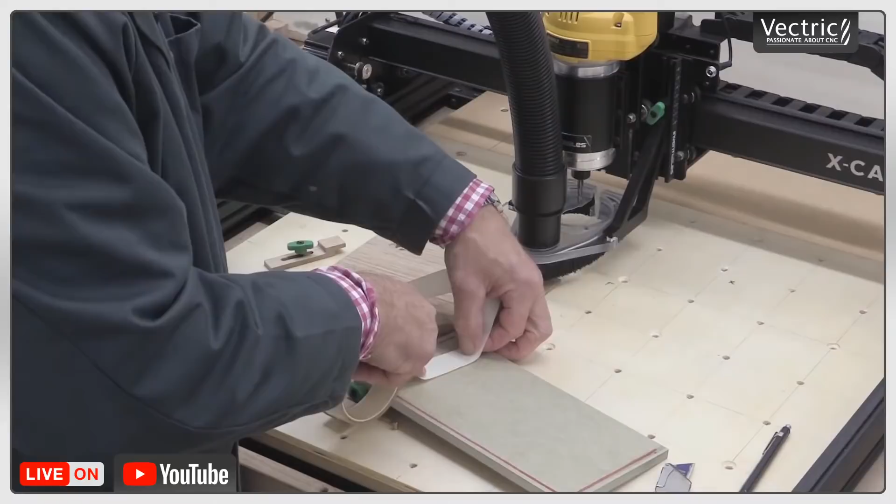Now in both these bits of work, the centre part of what I'm doing will be cut out, and I don't want that to go flying off. I could have had tabs to hold the middle bits in place, but I didn't want that little bit of cleaning up with sandpaper and a craft knife to roughen up the edge. So I'm using double-sided sellotape, and I'm going to stick some of it on here now, and that will hold the piece that ends up being cut out from the middle, stop it interfering with the rest of the cut.

And that's that done. You can probably just about see the shape that's been cut out, and my piece in the middle did not come detached from the double-sided tape, thank goodness. That's the first bit of template which you can see there.

There's the cutout. I'm now going to flip it like this, keeping that reference edge that side, and we've got the new reference side here. We can now send the next file.

So that's sent that file, and just as last time, the centerpiece didn't come adrift, and I can now take my template out of the machine, and hopefully it's job done. What I've done is stuck my workpiece down onto the sacrificial piece below it, so any cutouts won't move. I've got my reference edge here and the one at this end, which I'm lining up with the two edges of the piece I'm going to cut into.

And it's the plug for the hole that I'm going to do first. Get this nicely lined up as accurately as I can. That will give me a 5mm depth of cut. Now because this is a plug, I'm going to plunge down and keep the guide all the way against the circular part of the template.

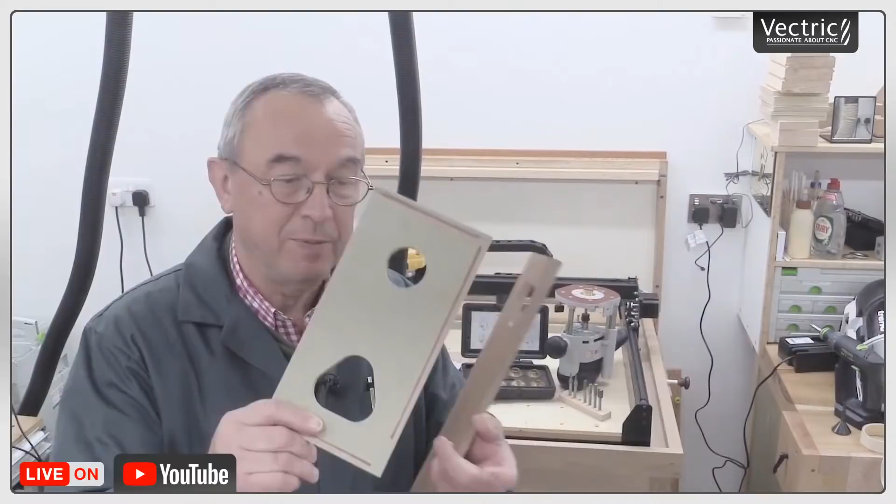Well, I hope you now have some ideas of how you can make templates of your own. And remember that if you're doing a template that needs two parts, as I've shown here, this idea of being able to flip it about a symmetrical line through there is the way to go. It then makes lining up so much easier.

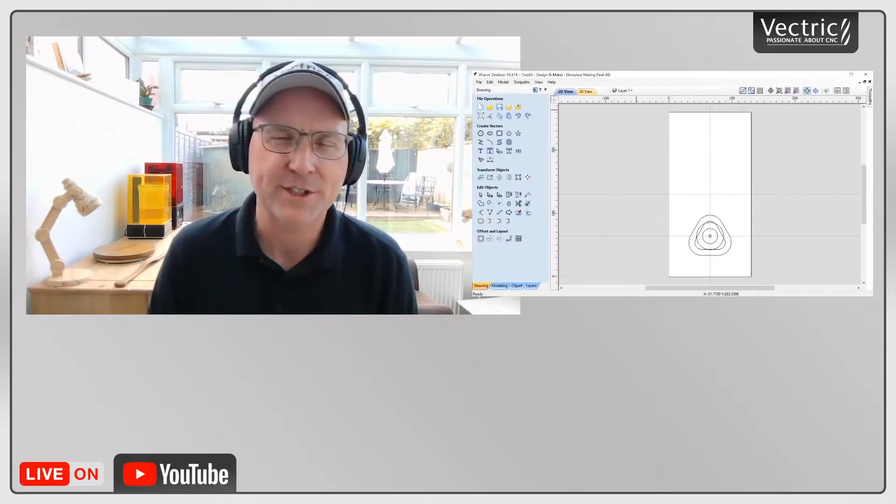So when Peter first started talking there, I was like, well, I can make all those parts with my CNC, why do I need a template for this kind of thing? And then it hit home to me as he was speaking, what if you had somebody out there who had a shop who didn't have a CNC, who wanted to make a part over and over again and needed the template for that? Well, this is the perfect setup for that, a perfect example of how you could make a template for another shop, and they could make a part over and over again if they want to. So it's great.

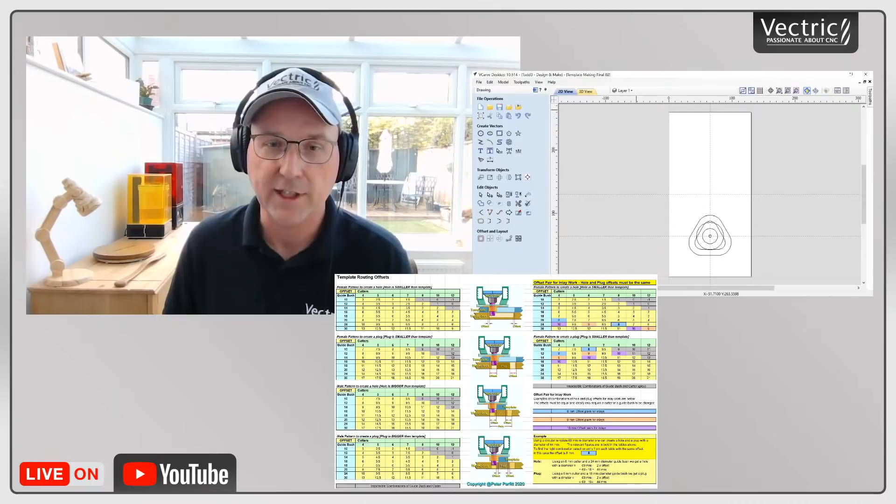Peter has given us that file, crazy generous, and also the router offset chart, so you can go ahead and do all the offsetting appropriately for the bushing and the tool you're using. Thanks Peter for all of that, that was a really good one, I really enjoyed that a lot. Peter was over the top generous with all that he gave us, and unfortunately I couldn't fit it all in, so I had to leave this one out.

There'll be a link below for this full video where you can see how Peter does a couple things. The important one is how he can fixture that piece of rough timber to his CNC machine flat, so he can put the channels in the bottom, so when he flips it over it'll sit nice and flat on top of the legs he's built.

He also shows you how to use a piece of clip art that comes free with your software to put that nice rosette on the side. And then he's come up with this scroll that he's given us to give away, that you can use for all kinds of different projects. It's just a VCarve file you can open up into your software, and put it on anything you want to.